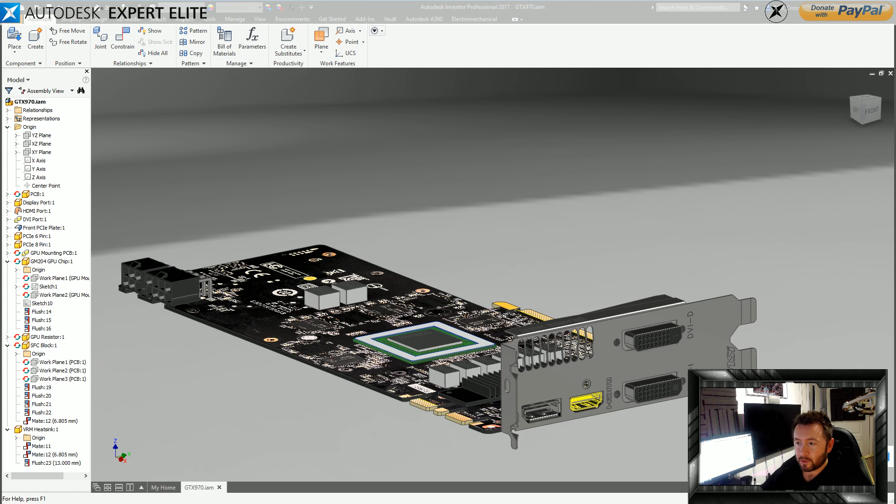Back with the DX Racer. Yes! DX Racer. I shouldn't really have this chair on stream, I don't really want to be endorsing this ridiculous company, but a bit more light there - way, that's better. The chair's just, I can't use it at night. I don't know if the mic's going to pick this up, but I'll get up and listen to the clunk. No, obviously it's not doing it, it's not a performing monkey. But at night it goes clunk and rattles the entire house and wakes the girlfriend up, so I have to swap chairs. I like it because it's got the lumbar support, that's good. If only the other chair had a lumbar support. I'm not buying a third chair, I've got no chairs in this bloody office.

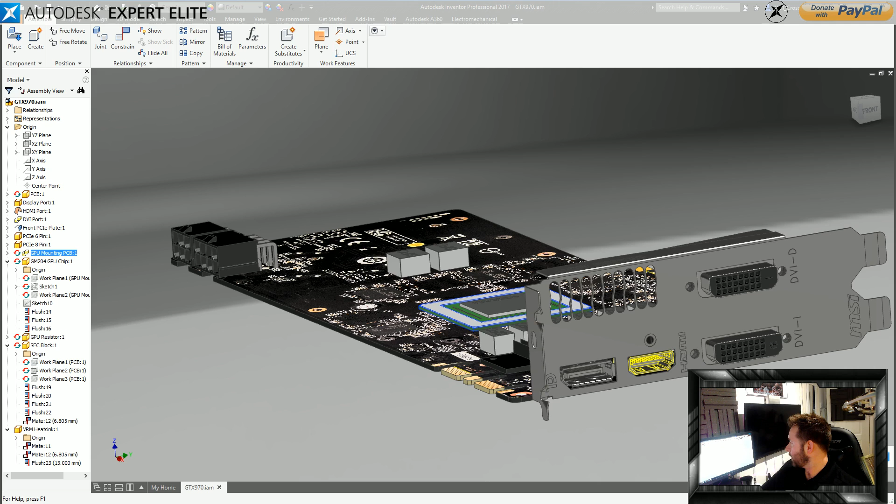Got the ports in: display port, HDMI port, DVI port. I modelled them, including the DVI port at the front. I modelled these two here and put them in a metal case, and these two here are pinched off the Molex website, which you would do anyway.

It's kind of cheating, but not cheating, because you don't. If you make graphics cards, you don't make ports, they're a standard, so you don't design ports. Everybody who makes graphics cards makes the same ports and buys them off a supplier. So if that supplier gives you 3D models, take them, because they're a lot better quality.

Well, you can model that pretty easily, it's just a bunch of sketches and stuff. You could do that easily, but it'll take you a couple hours to get that kind of detail. If someone's done it for you and it's legit from the supplier, get it.

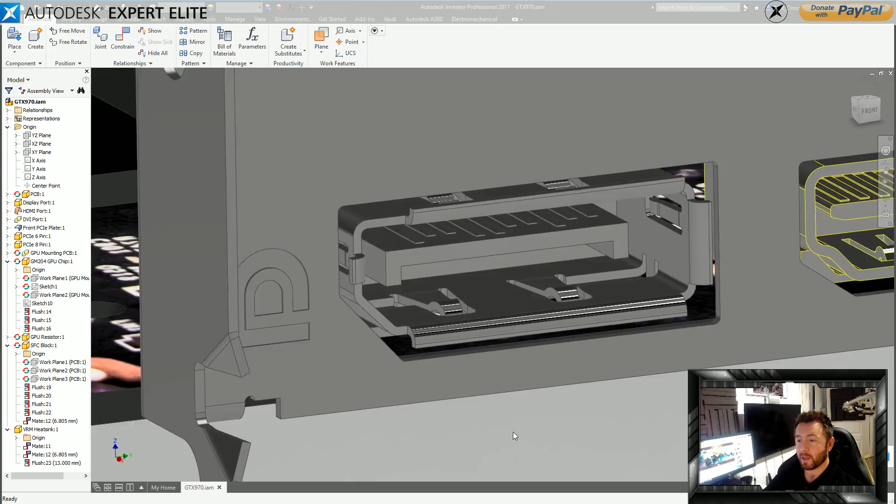But there we look, I even managed to, someone kindly told me what the Nvidia logo font was, so we've even got Nvidia etched into the GPU chip, which probably needs a couple of... does it need a? No, a GPU won't be filleted, will it? It won't have any chamfers on it. No, that's pretty solid. But that green circuit board is...

Hello. Oh, I modelled that, I think that's the VRM heatsink, which the camera's not picking up very well. But I modelled that. Where the hell's that model gone? I just remembered I did that. Or is it there and I've just overlooked it? Oh, there it is, yeah.

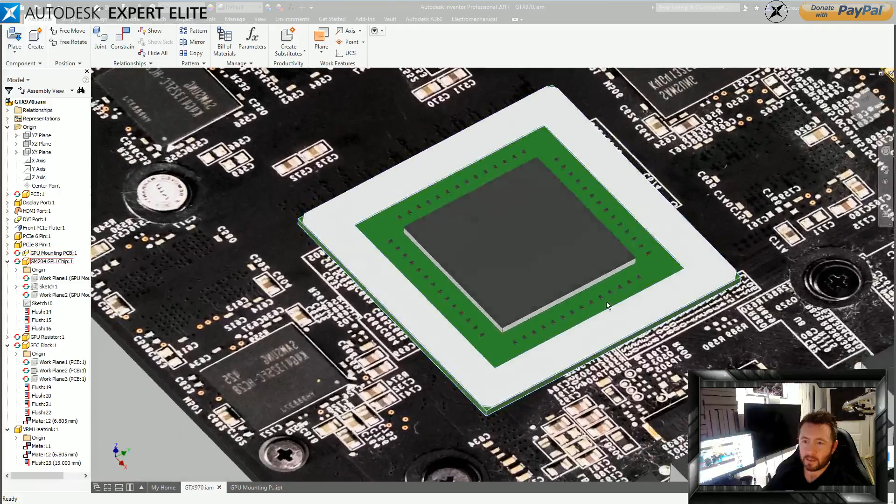One of the jobs I need to do is try and get this goddamn mounting PCB to the right colour, because it'd be trolling me, it's too light. One of the problems I had was when I opened it up explicitly, it's dark green, but then when you go to the assembly, it's a much lighter green. I think it was 2 AM England time by that point, and I was like, I'm too tired to try and figure this out.

I think I need to move on with my life and make it a future Neil's problem. But I think I made the solid body forest green, if I remember rightly, that's the top body, Neil. Solid 2, yeah, forest green, I made that forest green. But then in the assembly it'd be light green. What gives, man? What gives? There's no colour override at assembly level.

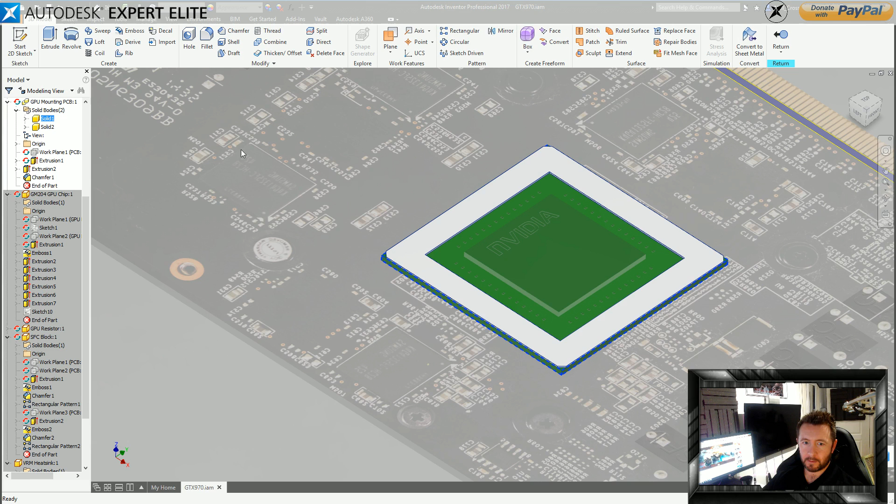Forest green, right, well that's right. I want to change it gold, let's see what happens, right? You're gold, always believe in your soul, you've got the power to know that you're indestructible, always believe in, now you are gold, and that you're bound to return something I should have learned, is your... sorry.

I think I probably should have had a break before I went back to work. Say green! It's still green!

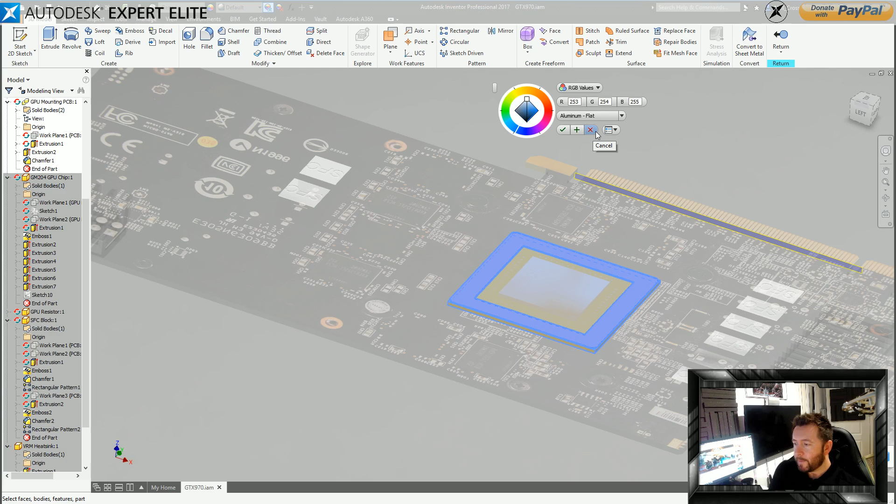Can you elaborate about implementing custom image-based lighting settings? There's very little you can do with Inventor's image-based lighting, very little you could do. They put it in, and admittedly they've admitted that it's there, but they've got no real intention of making it something which you can have full control over. You don't have much control over it.

Did I make a video on it? I can't remember if I did. I can't remember if I did a YouTube video on it or if I did it on the Pluralsight visualization course. But you can go to, where's the internet? Right, you can go to...

It worked. I've got a little pop-up. I'm kind of a big deal when someone subscribes.

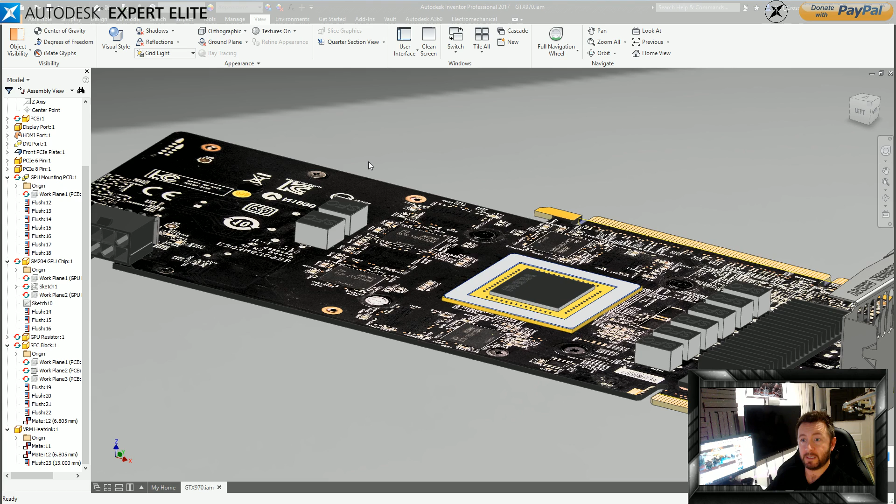But if you want a video on something like that, I can do something on it. I'm gonna have to learn it myself though, because I can create custom lighting styles, I know where it stores them, I know how to copy and edit them. But to change where the lighting originates from within the image source, that's what I need to look up on, and whether you can even do it at all.

So it's possible. It's possible.

How many people are here now? I'm going to keep an eye on the numbers. 37, that's good, that's a good number. It's still, and I stand by it, the biggest Inventor live stream in the world. Go find me another live stream right now that's got more than 37 people watching it. I thank you.

I'm a machine engineer student though. Machine engineer. That sounds way too intelligent for me. I will bow down and submit to your intelligence.

I had the same problem the other day. I changed the selection priority I had, but it may have just been a fluke, it was working afterwards. I don't know if this is selection priority, because the only colour overrides I've got on this are at body level. So if I go to the face of the part, that's as feature, and the feature, which is the extrusion, that should be as body. Yeah, that's as body. And then the body is gold. But if you open up the chip into a separate window, it's green.

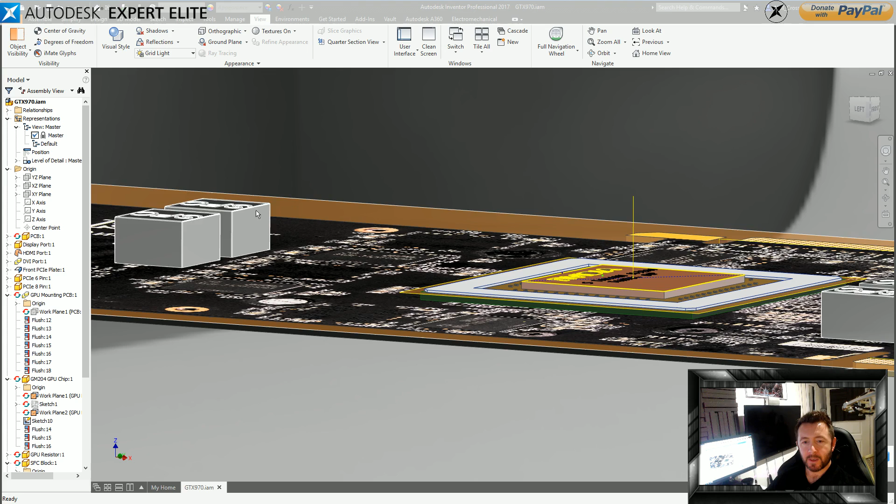So it's changing its colour. Oh, hang on a minute. I wonder if it's storing the colour in that. If I change... you've gone green. I fucking knew it. I knew it. I didn't know it, I just figured it out. So what it was doing, because I'm changing the colour whilst I'm in an assembly, it's storing the colour as an override into the view rep called default. So it's saying you're using the view rep default and you've made the chip gold, so that colour is only visible in that view rep. Whereas if I go back to master, which is everything default, there's green. Son of a bitch.

Right, so what I need to do. I've lost the colour though, because I made it forest green, but then I edited the colour and made forest green darker because it wasn't dark enough. Oh, so let's go into here. Forest green, can I add that to the material library? I don't really need to.

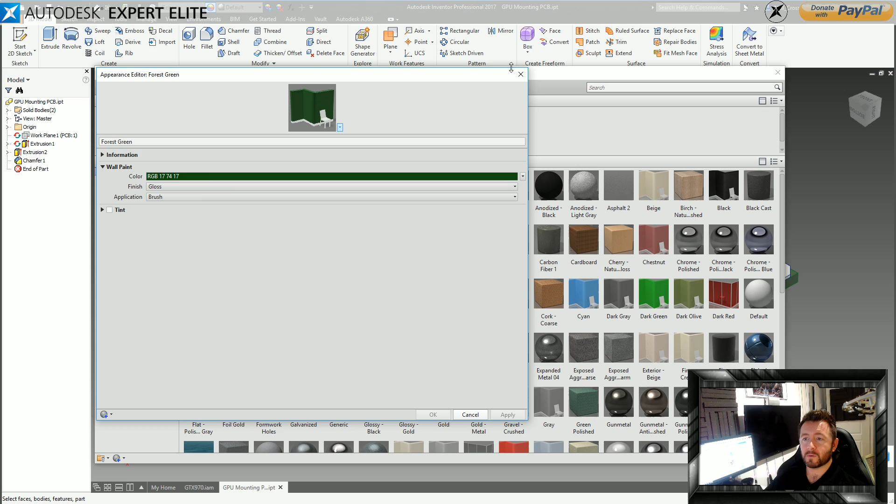17, 74, 17. Forest green, is that still lighter? 17, 74, 17, like... it's hard to tell, isn't it? Is that the same green as that? Bloody hard to tell, I don't think it is, I think that one's lighter.

Right, so maybe it's picking it up from the assembly level colour. That's why. So it's 17, 74, 17. Okay.

There we go. Why has it made the top bit green? Didn't ask you to do that, did I? No. At no point did anyone say, oh, let's give it a flipping override. Let's give it a part level override.

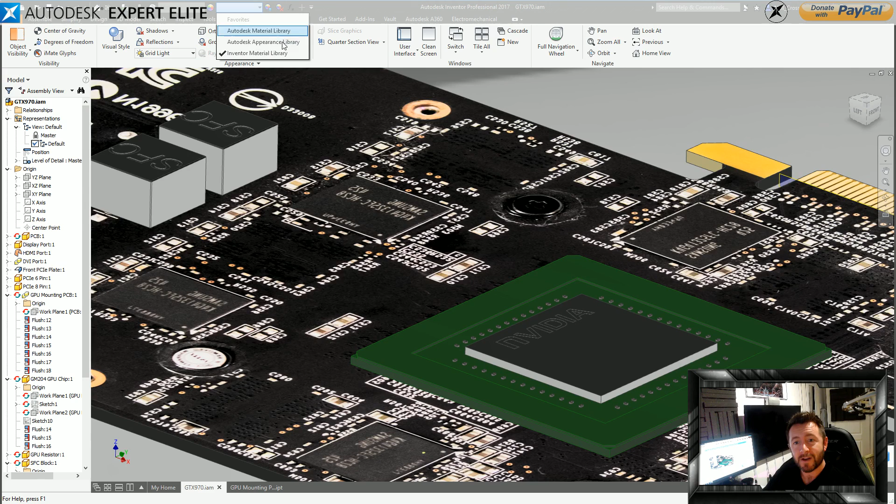Oh, I don't think anyone from Autodesk's watching this. If anyone from Autodesk, which I know watches these videos, hi. Could you please fix this stupid scroll thing here? Why is that scroll bar that big? Look how big that scroll bar is. That's a big, beefy, chunky scroll bar, plenty of meat to grab out of that one. You've got this one here, it's fucking tiny, why? Fix it, fix your shit. It's so small that it kind of blends into everything else, which isn't apparently obvious right now, but sometimes it can.

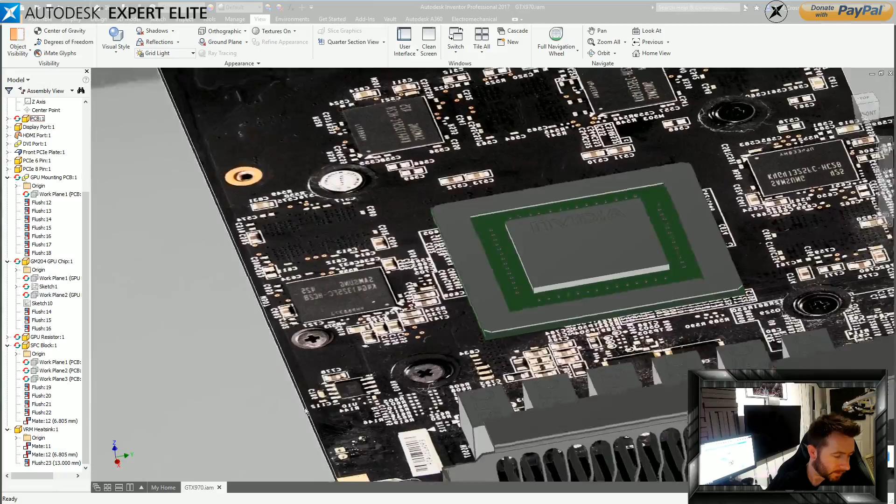Yes, that's better, shiny, it's the same chrome. I think the chip should be black chrome. Actually, no, I think I'm going to change the solid. I'm going to change the shroud again because that's too shiny, it's not that shiny in real life, so we'll fix this one. Maybe aluminium polished. Yes, that's about right. Okay, we're done with that. So what next?

What next? I need to create the USB header on the back, that white thing there. Which is so boring to model, but it's one of those things that when it's on, you're like, oh, that looks quite realistic and detailed. And unfortunately, I don't think I've got a supplier model. I've looked.

Right, so this is going to be tedious, but has to be done. Has to be done. I said no compromise detailing. God damn it, I mean no compromise detail. So where's my trusty tape measure? Who's pinched my trusty tape measure?

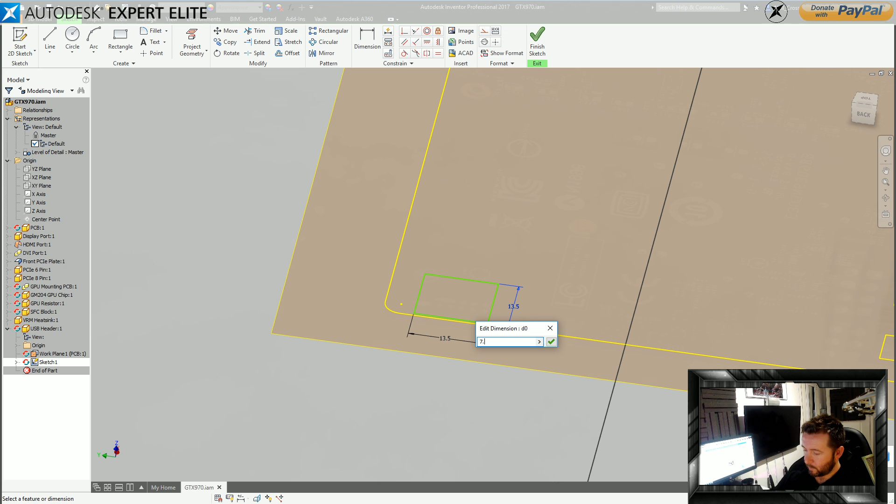No, that's the wrong way. I didn't even need to undo that. Why did I just undo that? I could have just changed that. 13.5, 7.5. It's better. Right.

And then distance on the board. 1, 2, 3, 4, call it 5. This is why it's good to cheat and get a supplier component if you can. That's going to make new solid, isn't it? Yes.

Yes, yes, okay. And then, how thick is this goddamn bit of plastic? Here we go, oh, there it is. Whoa, it's a thin bit of plastic, aren't I? I'm going to call that 0.3. Call it 0.3, and then should I just offset?

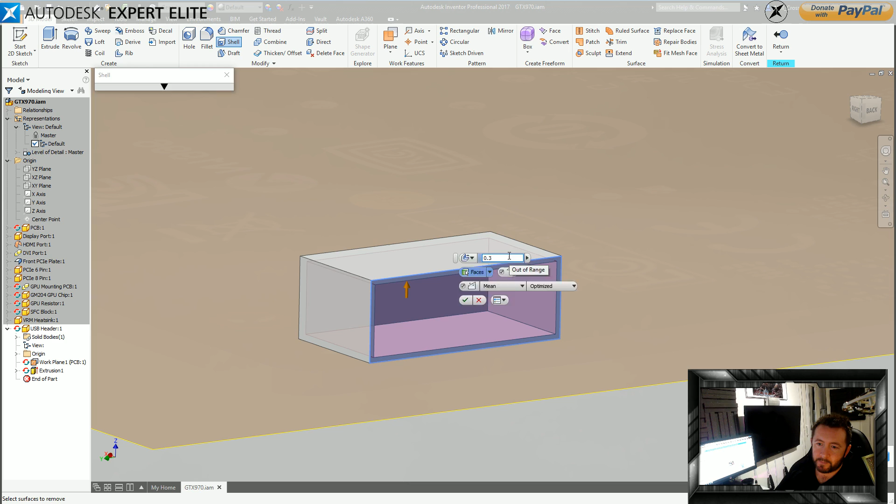Point 0.3, and then Neil, you're a flipping idiot, you've got people watching you doing it so bad practice. Right, I should have shelled it. People watching, that's what I should have done. Right.

And then call it one, oh shit, the bed. Let's call that 6? Wow, the amount of effort I've got to put into modelling a flipping USB header, which nobody gives a shit about. Right, 6 by 5. Ah, that's not right, 6 by 4.

6, oh my god, that's infuriating. That is infuriating, I can probably turn it off, but there might be a time where I need it. It's when you click its dimension, you pull it away to place it, and then it picks up on an edge in the background, it's like, I'm going to place this dimension. Fuck off!

6 by 4. Okay, and then that needs to be central. Actually, that probably is by 5, it's a bit far away from the edge. We can edit it later. Alright. Whoops. No. There, okay.

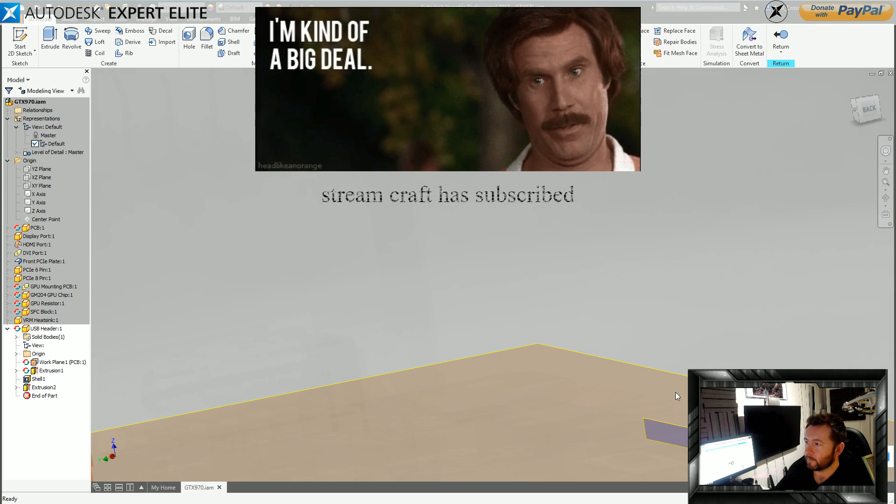Anybody who just says, nope, we're not using it, and says it lightly, like it's not a big deal - it is a big deal. It's an integral part. Kind of a big deal. Exactly, it's a big deal, mate. Thank you, Streamcraft. But yes, it's an integral part of 3D CAD.

Adaptivity is like, yeah, you've got adaptive parts, which is cross-part geometry - change one part, another one updates. But you could argue that adaptivity is also linking two dimensions together, a formula between two dimensions in a single model. That's kind of adaptive, that's adaptivity in a roundabout way. It's an integral part of 3D CAD. There's no point having 3D CAD if it behaves like an AutoCAD drawing where you change one thing and nothing else updates. In my opinion, anyway.

My opinion. Right, I'm going to have to start making some of this up as I go along. This is really not worth spending a lot of effort on a USB header, so let's... I don't think anyone's going to inspect it that close to see if I've got it precision crafted on the USB header. So let's go down by 0.5, down here, something like that. I'm making this up, call it 1.35, call that 0.8.

There's something I liked about Fusion 360, and since I've used it I've always wanted to do it in Inventor, but it doesn't do it. In Fusion, when you've got a closed profile like this, that's an extrudable profile. You can just click the profile and a little pop-up comes up to say extrude, and you can just go straight away. But in Inventor, you've got to click extrude, and then click the profile. It's not the end of the world, it's just a nice little workflow in Fusion. I made an idea station post for it, so I liked it.

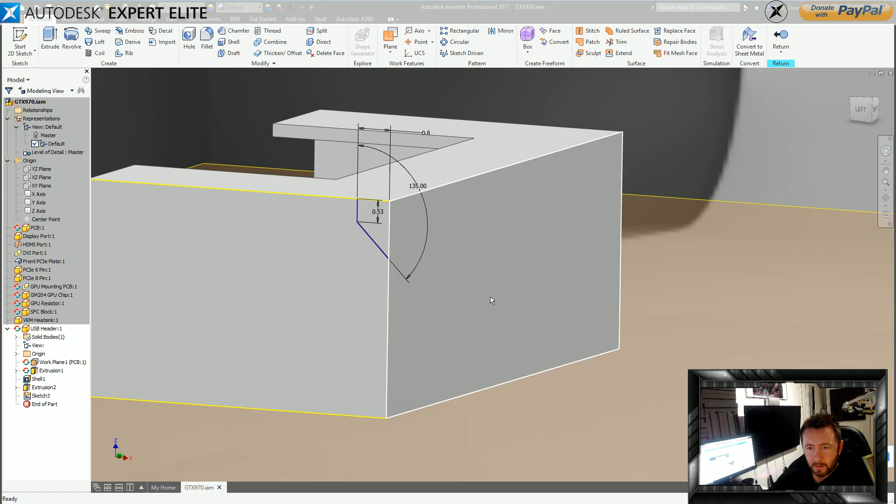Have I tried Meshmaker VR? No, I think I've heard of it. Didn't someone email me about Meshmaker VR? I think someone emailed me about it, but I'm so goddamn busy at the moment that I haven't really had a chance. Bollocks.

Hey? Oh, there it is.

Okay, maybe shelling wasn't such a good idea. So let's, for the sake of it, pull this wall back by a mil. Is that going to work? Yes, that'll work. Alright, and then I need to push that off there and then extrude that through all. Boom, there we are.

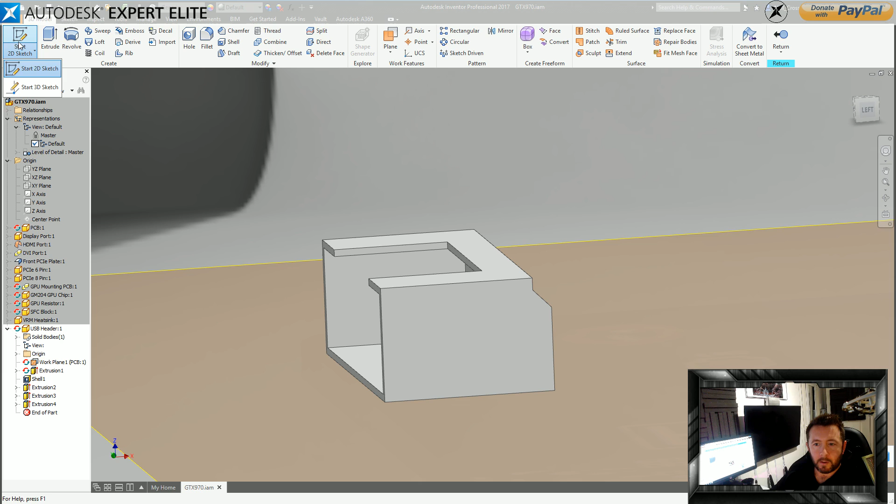Alright, and then there's a nice little groove, about halfway through there, about halfway through. How are we going to do this groove? How are we going to do this groove? We can do it this way.

Right, down there, down there - I don't know how thick this is. 0.5? Something like that. I need this to be central as well, between here and here. So then all I need to do - not that one - is grab that and push that by 0.1. No, 2, 3, 3. Cut. That way, that way.

So you agree you should be parametric, but whenever you've utilised adaptivity between parts, it's been a disaster later on. Yes, it can be - on big assemblies it can be a nightmare. It can slow the performance of Inventor down significantly, as it's trying to solve adaptivity and figure out what's joined to what, and whether stuff is still updating.

A lot of companies break the adaptivity on big models, like vehicular size models, not coffee machine size models. They'll break the adaptivity just because it becomes a bit unmanageable later on. When you've got a GA the size of a vehicle, you tend not to rely on adaptivity for updates. It's all individual component level updates. You're changing a plate, changing a part, and not relying on the CAD software to figure out what updates because it's a project. It's engineer controlled, so you'll know as an engineer when you change something what else needs to change. So adaptivity isn't such a big deal on that kind of work, but it still has its uses.

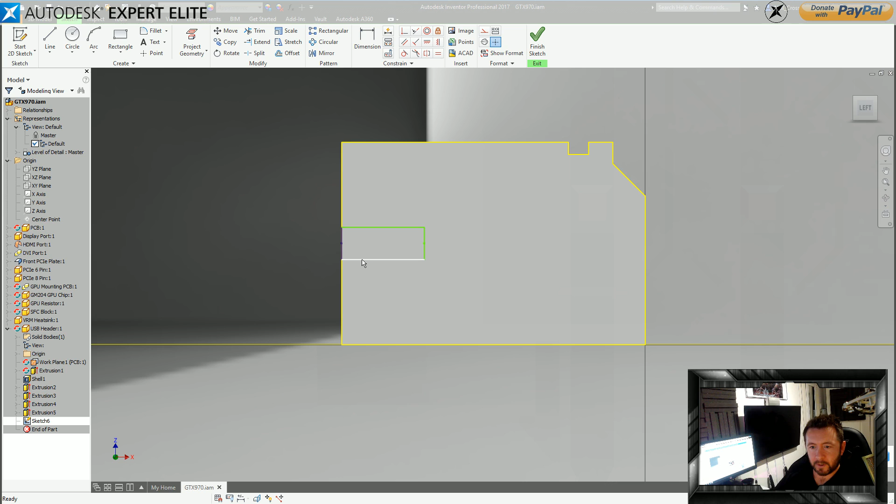Is that even in the middle? It's not even in the middle. Jesus Christ, frighten the life out of me. Right, let's make that there. That'll do. Whatevs, man, whatevs. Right, I think I'll do this and put some pins in it, and then we'll call it.

So I'm alright, well actually there's a couple of little square cut holes here. Fucking Molex, the component makers, ain't got shit on me. I'll sell this model to them. Oh yeah, excuse me Molex, I couldn't help but notice you didn't model your own USB headers. I happen to have done it, pay me some royalties and we can talk. Because evidently you don't know how to do it, evidently it's a bit too much of a challenge for you.

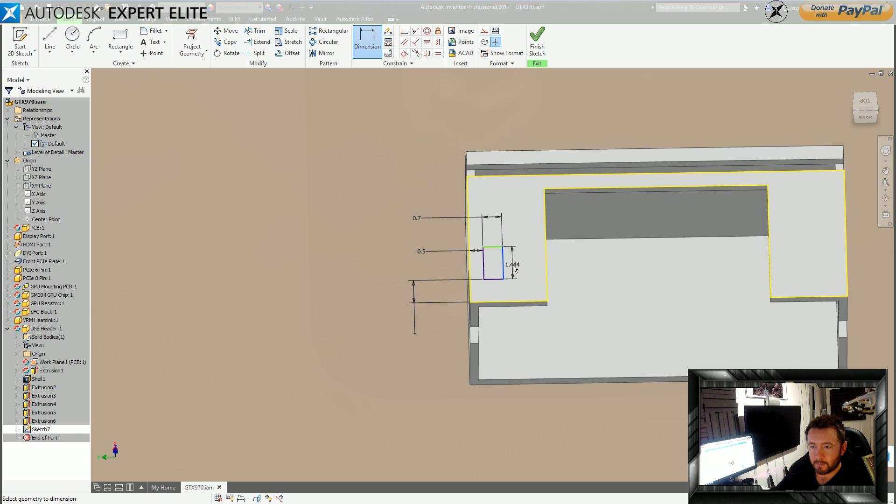That'll do, extrude that to there. Okay, and did I make this central around? Oh Neil, that is shocking. That is terrible.

Never mind, what we'll do is just make a plane. Oh, fuck you. From there to there. Right, and then mirror that around that. Boom. And then you can suck a fat one.

That's it, we just need some pins and we're golden. We're golden on the header. One, two, three, four, five, six pins. Six pins. How are we going to do these? Are these just attached to the back? Yes, they're just attached to the back.

Right, square, and call it 0.2 by 0.2. Well, that's a bit small, isn't it? 0.5 by 0.5. I don't care if you're not central, you're going to be central. And then what's that, 12.9. 2.15. One, two, three, four, five, six, seven, 12.9 by 7. Whoa, 1.85.

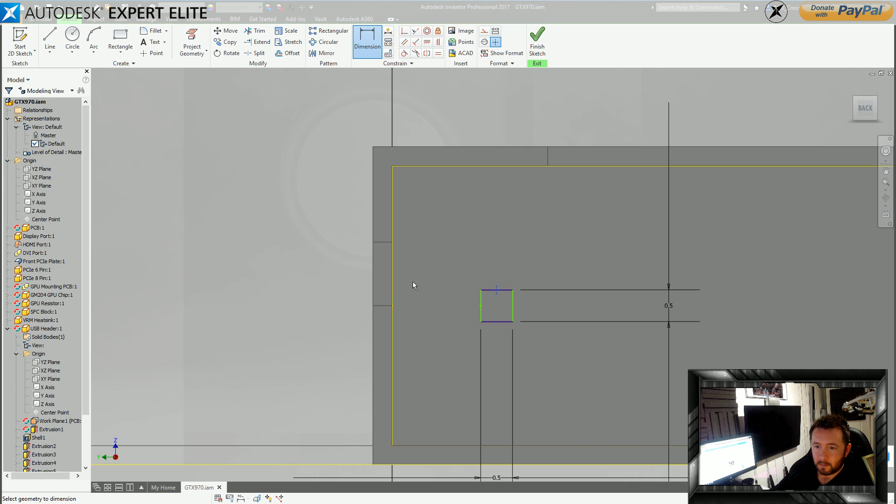Oh, I don't know, I sometimes do wish I knew what I was doing. 1.85. If this works, I'm gonna promote my maths skills as being a little bit better than I thought they were. However, I'm not holding up hope.

So let's pull that out. How far does that go? About there, let's call it 4. Rectangular pattern, you can go that way. No, you can go that way. I said that way. Six at 1.85. Oh, look at that, boom. Creamy. So if I've done my maths right, that should be 1.85-ish to there.

Fuck! Oh no, because that was 1.85 to the center, so that's 1.55. 1.6. 1.55, close enough for me. Is there a way to set a work plane as an origin plane?

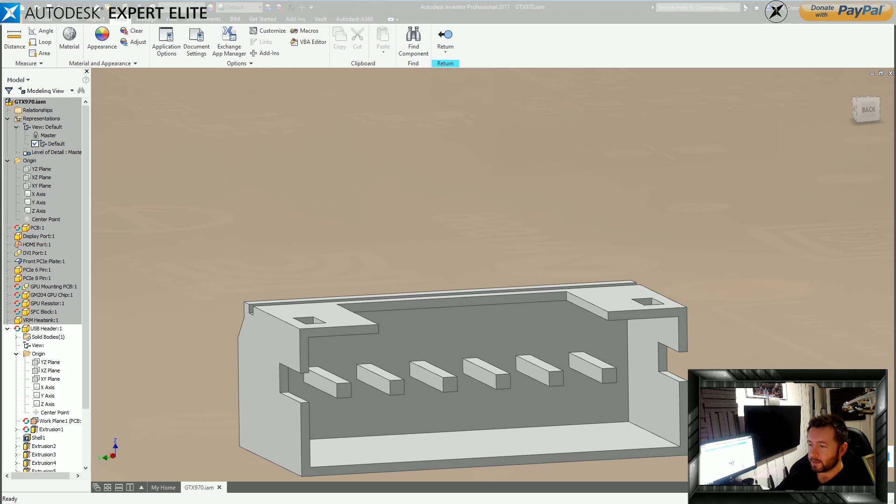No, the origin planes are work planes, mate. When you start a new model, those are work planes. You can keep them on if you control shift them and then right click visibility. See, they're just work planes. They don't behave really any different to normal work planes, other than you can't move them, you can't flip them, but they are work planes. You can't create your own work plane and set that as an origin plane, but you can create your own work planes and give the model a new UCS, a custom UCS. You can do that, which is something I haven't done a video on yet because I haven't really used it myself that much, but you can make custom UCSs.

Right, and then the last bit, which I completely forgot about, but it's not important, is just the little cutout at the back. So, there.

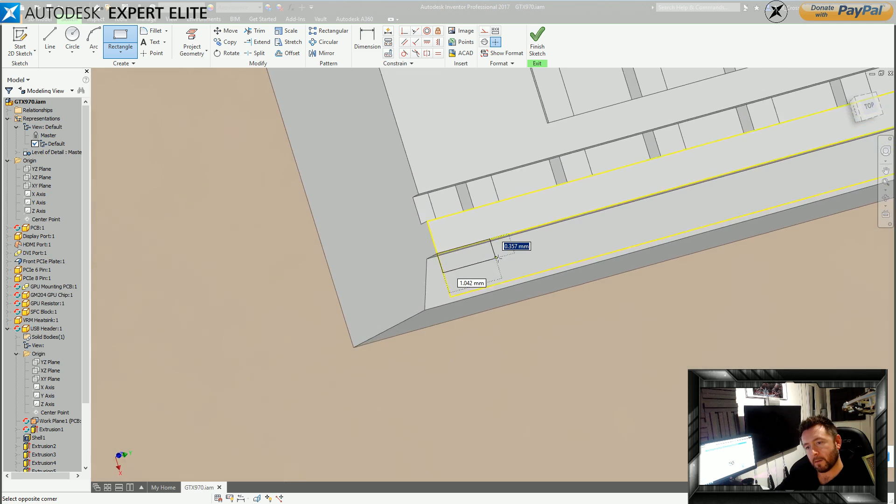Hello Andrew, mate, welcome to the party where we're all having such a great time. Sing Kumbaya. What am I doing? Alright, I know what I'm doing.

Actually it's not a bad turnout, to be fair, what's it, 38 people watching. It's 4:30 English time, so never eat shredded wheat. West Coast of America, they're not online yet, I don't think, it's still really early there, and that's where the majority of the audience are on YouTube. Yes, I just said never eat shredded wheat, fucking bite me. That's how I remember northeast, southwest. Don't judge me, please.

USB header. All rights reserved. Patent pending.

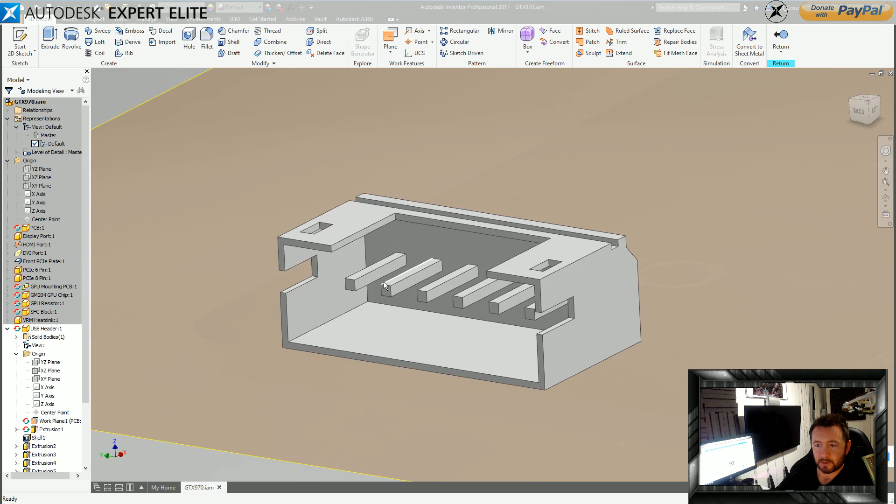The temptation to chamfer the end of those pins is strong, but someone told me off for doing it yesterday, so I ain't going to do it. Okay, we're going to make this white, sort of a ghastly creamy white. No, it's brighter than that, isn't it? Make it white, that'll do. And then the pins - I should have made those their own body, shouldn't I? If I do this, is it going to break the pattern? No.

Hey yes, get in, get in. Gold metal, there we go. Right, USB header done. So what were you saying about recentering your model?

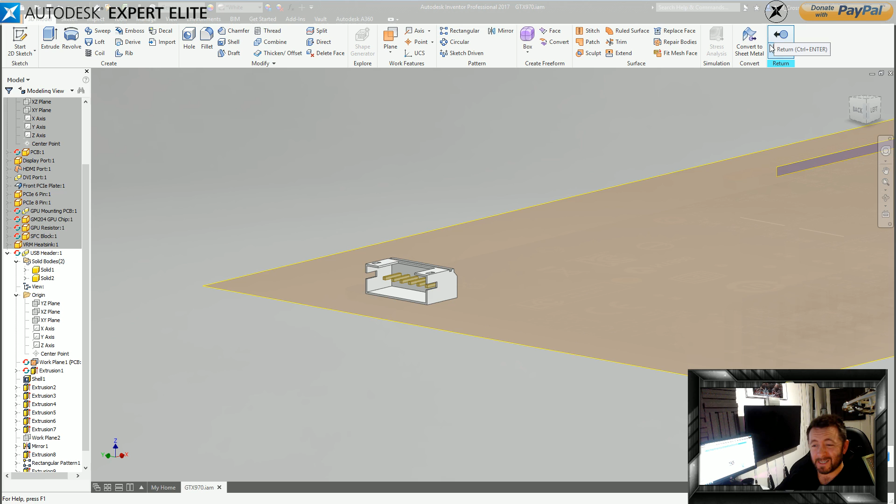No, you can't. If you've modeled the whole thing over here in the center plane of the actual part, the origin plane is over here. You can't move that, you can't move the origin. You'd have to move the original sketch back to there, but it's best practice to have it symmetrical around the center planes. It's not the end of the world if it isn't, it just makes it difficult to arrange and line it up in an assembly later on.

Donald Trump says, maybe in quotes, US intelligence agencies released a dossier alleging Russia has compromising material about whatever.

Can't wait for Trump to get in. Okay, but let's not make this political, because I am not from the US, so I don't understand what's going on.

Oh man, there's one more port. Right. Nope, I have to do it. I said no compromised details, so we're doing this. Right, so there's another port out there, that's the soldering point for it, so we're going to do it above that. So new, I don't even know what this is, it's like a 2-pin.

I think it's the fan, I think it's the fan controller, the port for the fans. So we're going to call it fan port.

Do you upload the live streams after? Gotta run lunch. If they're on YouTube, they'll get automatically uploaded to the channel, so yes it'll go on the channel. I'm still in two minds whether that's a good thing, because this is just me waffling on and not really putting up anything of structured value. But if you want to watch them, you can. Not always the nice guy. Well mate, your message is kind of nice. Thank you very much.

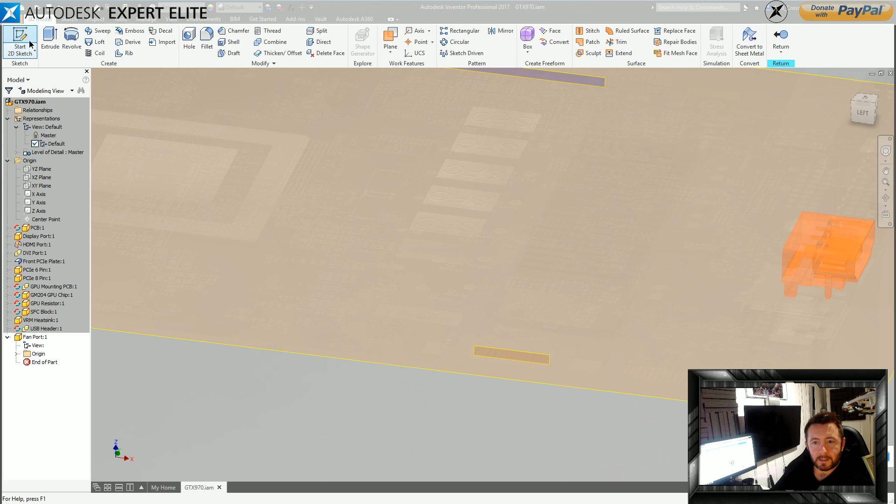Start 2D Sketch, where am I going? Where's the PCB, there it is. Right, and then the port, right, it's about there isn't it? So we're going to go there. Where's my trusty tape measure?

Got 5mm by 4. 5mm by 4, 5 by 4, 5 by 4. And then call it 5 from there. And is it flush with the edge? Obviously not, about half a mm. Oh there, right. Depth 6, call it 6. Right.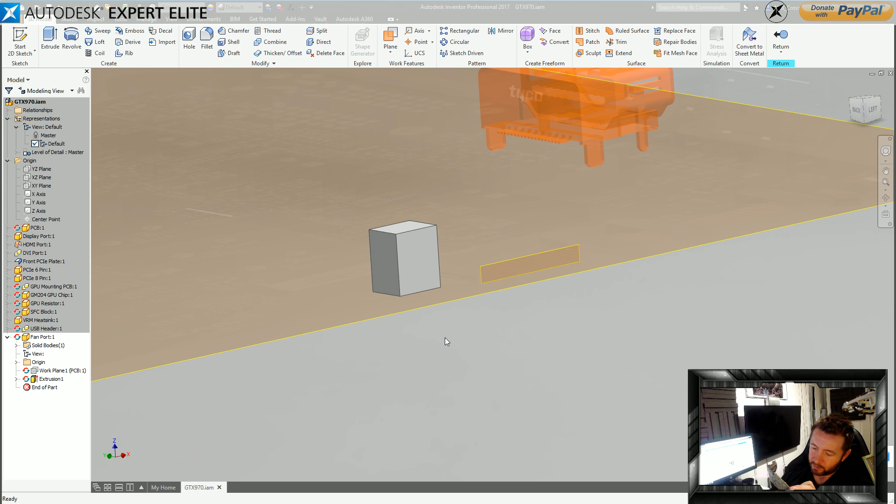Not really the best time of day to be doing an experiment like that, given that the Americans on the West Coast aren't really alive yet, because according to the YouTube stats, most of my audience is in America and Canada.

That'll do. Right, and then which memo? Why am I looking at this? Right, so I need to go on this side here.

But I ain't streaming for too long, I've got maybe an hour left, about an hour left, and I might come on later tonight again. I don't know, don't know. Depends, I might need to spend some time with the girlfriend, because I've been busy as balls this week, not really done much.

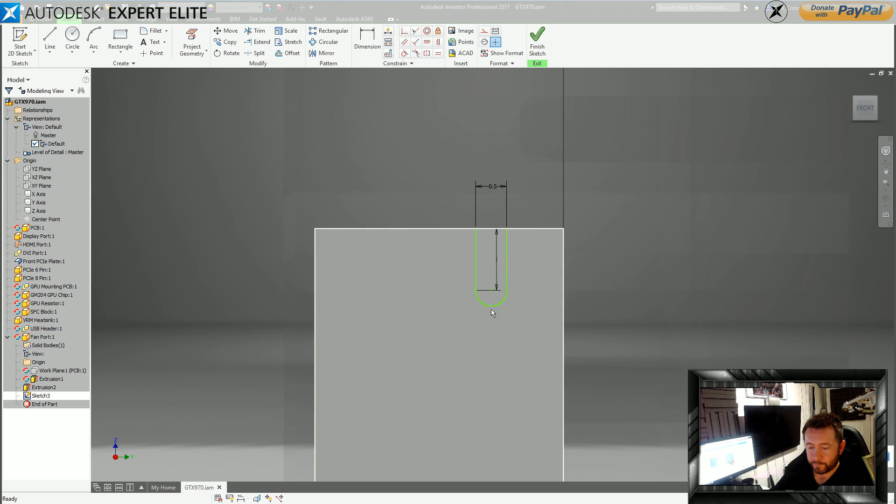I've already done that dimension. You're alright, okay.

Just bring them all over to Twitch, it's far better for streaming. You can still get some of the nice things in YouTube, like I've got XSplit set up to do subscriber notifications and donation notifications, but I haven't seen that happen yet. So you can still do all that on YouTube, but Twitch gives you better moderator tools and better add-in support, and the dashboard on Twitch is a lot better.

Right. Where's the inside of the board there? Right.

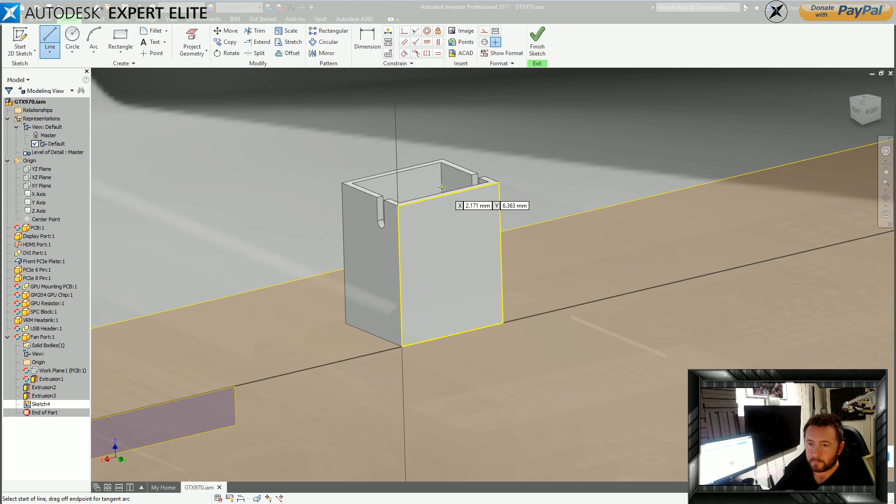But if I'm going to do this on a regular basis, I might need to get a dedicated streaming PC. I haven't figured out why yet, but I've just heard that's what most people do. They say, 'Oh, I've got a stream PC.' Why? Don't know why. Unless it's just so that nothing changes, everything's set up right, and you can just turn it on and go. Maybe, I don't know. Unless it's more powerful of a PC than their other PCs, perhaps. Whoopsies.

That cut to there. Right, that'll do for the header, and now I just need the pins.

Oh, stop it, zoom extending. What do I do? 0.5. 0.5. Then, how far from the center?

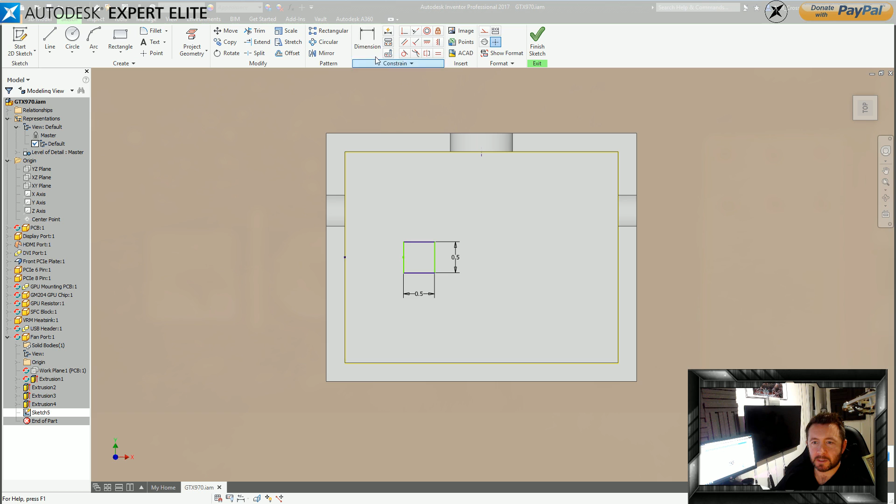Point there. Do you know what would be nice? It would be so nice if the Inventor team - hi if you're watching - could let you dimension to a midpoint without having to put a sodding point on. For crying out loud, come on, even AutoCAD can do that, can it? Can AutoCAD do that? You can snap to the midpoint, can't you, in AutoCAD?

One. You see my AutoCAD video I did the other day, yesterday? It's a bit strange, but apparently - I was quite shocked that you could do PDFs to AutoCAD.

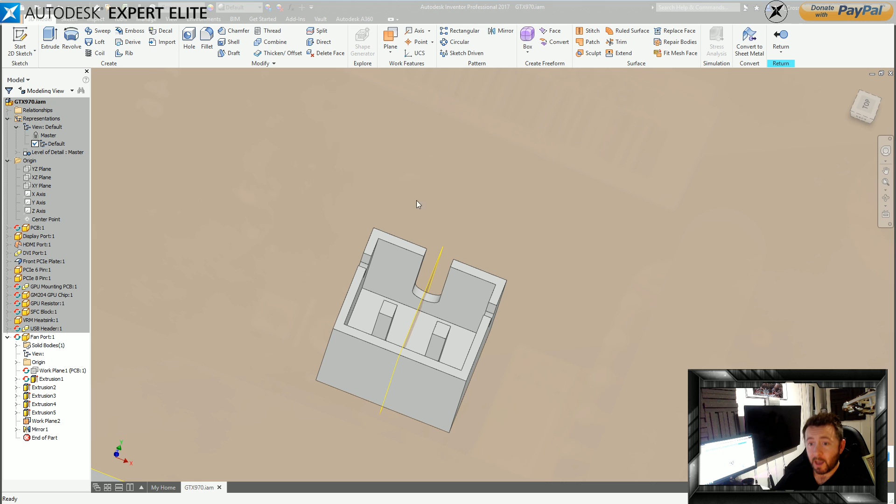You don't use a 3D mouse? Yes, I use a 3D mouse. Of course I use a 3D mouse, there's no way this is happening without a 3D mouse, man. Getting outdone without a 3D mouse. In fact, I've got 1, 2, 3 - I've got 3 3D mice, 2 Enterprises and 1 Space Mouse Wireless. I gave away a Space Mouse Pro, and very soon on the channel there's going to be another giveaway on a Space Mouse Pro, very soon.

Right, gold - that's the same colour, that's white. So we're going to make the entire part white, and then make that body there gold. Always believe in yourself. Gold medal. Boosh. Good, goody gumdrops.

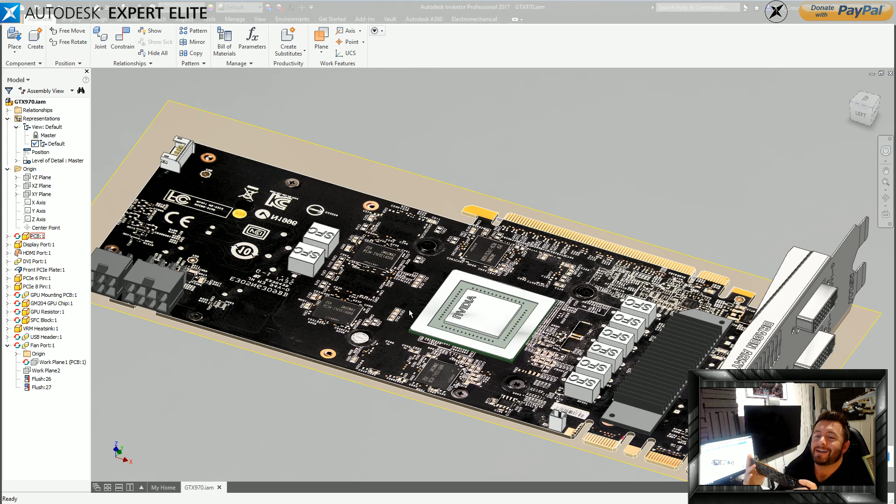Right then, are we done here? So there's some little capacitors and stuff on here, but can I be bothered to model them up? I might model the capacitors if, when the heat pipe and heat sink and stuff goes on, you can still see through where the capacitors should be - then I'll have to model them up. But for now, nah, can't be bothered. Same with the chips, the VRAM chips, these things here - not modeling them. I think that looks good, I think that looks goody gumdrops.

Is this another epic episode? Nah, not today. I'm doing probably another 45 minutes and then I'm gonna have a break, and then I might come back on later tonight. Depends, I'm not sure yet.

Right, so now I've got to model this thing, which is - well, that's annoying. Where I've got my webcam placed on the YouTube video, I can see it in the background, this silly little YouTube icon, so it looks like there's two of me. It looks like I'm sitting next to myself. That looks ridiculous, I'm going to have to fix that. That's annoying, why didn't someone say something about that?

So I'm going to take the frame and the webcam... then, right, let's just do this - frame, webcam. Better. Right, if that's obstructing any views, just let us know. If there's something you need to see, like in the browser, and you can't see it, just let us know.

Right, this shroud then - where does this go? I've dismantled this, and now I can't remember where anything goes. I think it goes over there. Oh shit. Uh-oh. Uh-oh. Ah, goes there.

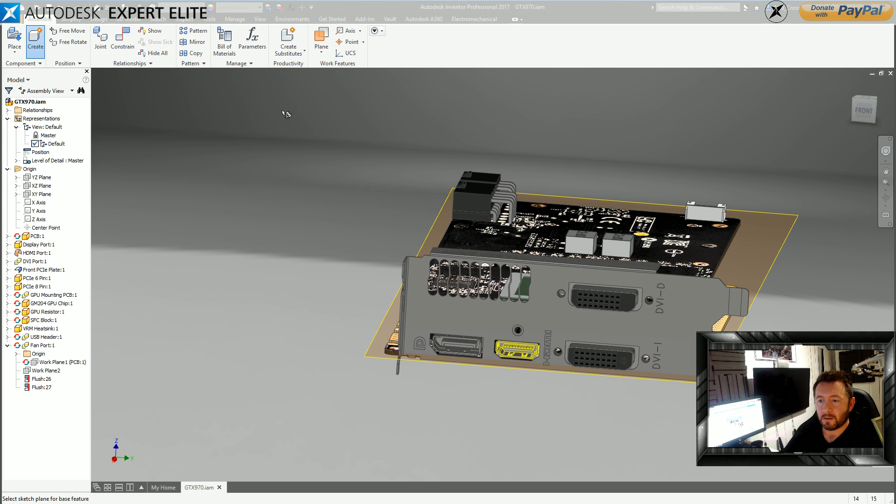Damn, I missed watching you mumble. I do mumble a lot, don't I? If it's inaudible over the music, where's the music on? Ooh, there's only 10 minutes of music left on the Mists of Pandaria soundtrack. Play some WoW - I really don't think that'll go down very well. Oh, patch 7, just don't worry about it. There's a new World of Warcraft patch out today which is apparently a big deal, and I completely forgot about it.

Oh man, bollocks. Undo, undo, undo, start again. I should have made that the sheet metal template. Heat guard - oh it's gonna say that part already exists. Yes, damn it. Heat plate.

Sheet metal defaults - right, so what's the thickness? What thickness have we got going on here? I'd say about a mil. No, not 1 mil. It's about 1.75.

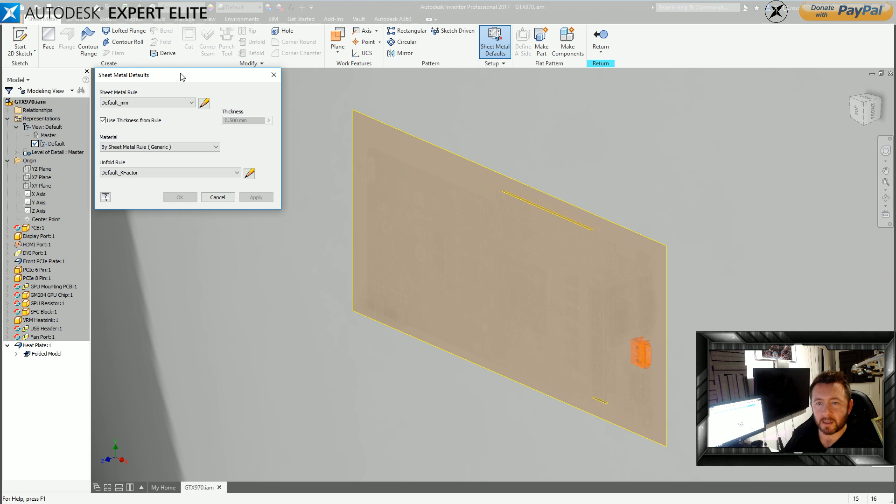Converted sheet metal works - yes I know, but I hadn't modeled anything yet, so I might as well just made a new one. 1.75. Metal, what is it? I don't know, I don't know.

So I need to dodge - this plate has to dodge the two blocks which are there. So there's a block there and a block there. And then it needs to dodge that there, so that's another thing it needs to dodge. And then there's a couple of SMD things here, little resistors and capacitors down here. And then it needs to come all the way down here to where my header is, which is there. I need to dodge around that. Okay.

I wanted to ask, do you have any experience with architectural work with any Autodesk products? I saw Revit is the program to go to. Have a few ideas for houses and stuff, wanted to play around and see if I can get something done. Well, Revit's your boy, Revit's the boy. I've got very limited experience with Revit - started learning it when I was like 24, long time ago. But I haven't really used it since. But Revit is the kind of go-to package for anyone designing houses and any kind of buildings.

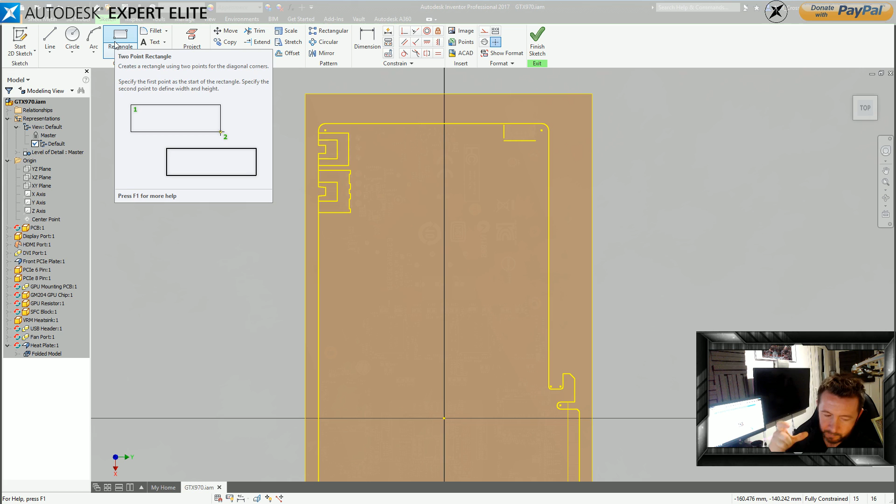Oh fucker, it's not even on the PCB. I've slapped this sketch on the PCB board - it's not even on it. It's raised with thermal pads by 2 mil. So observe my magnificence - I've placed my sketch on the wrong plane. Not to worry, because we can do this: we can raise the work plane up by 2 mil, and then we can go to the sketch and redefine it, and then drop it onto the new plane.

Where's the new plane gone? Where's my new plane? Is that the new plane? Yes. No, because the plane has to exist before the sketch, like that. So, sketch - I need to redefine that onto the new plane. Boom, now our sketch is 2 mil higher. Yes, our work plane's now... yes, that's redundant, okay.

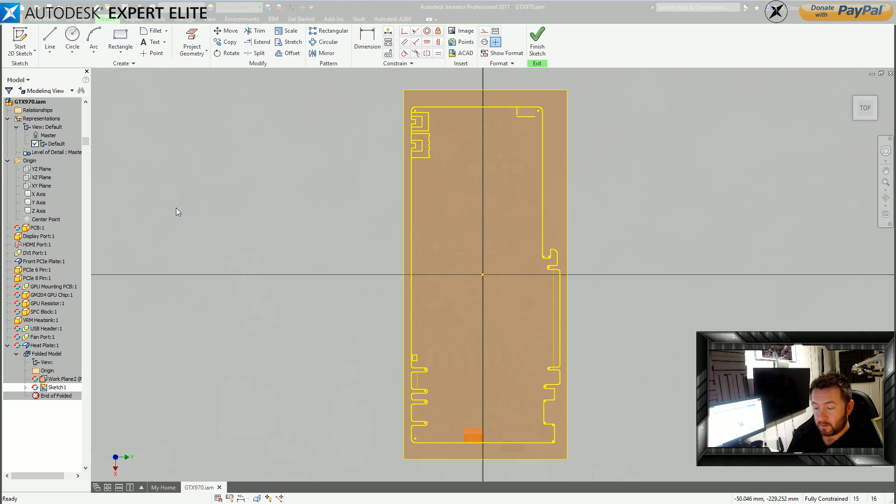Right, I'm gonna sketch out this approximately, and then put the dimensions on. So I'm gonna come on there, and then to there, and then that comes down there, something like this, and something like that. And that comes across to about there, that comes down about there.

And there. I wish they wouldn't do that, man. When you finish the line command on a point that's coincident, it just stops the line command. It's infuriating. Watch this - I'm still clicking, click, click, click, click. You come to a point, boom, it just stops it. I don't want you to stop, man. Trying my patience.

And that comes up to about there, and over there, and then roughly about there, and then about there, closing up about there. Right.

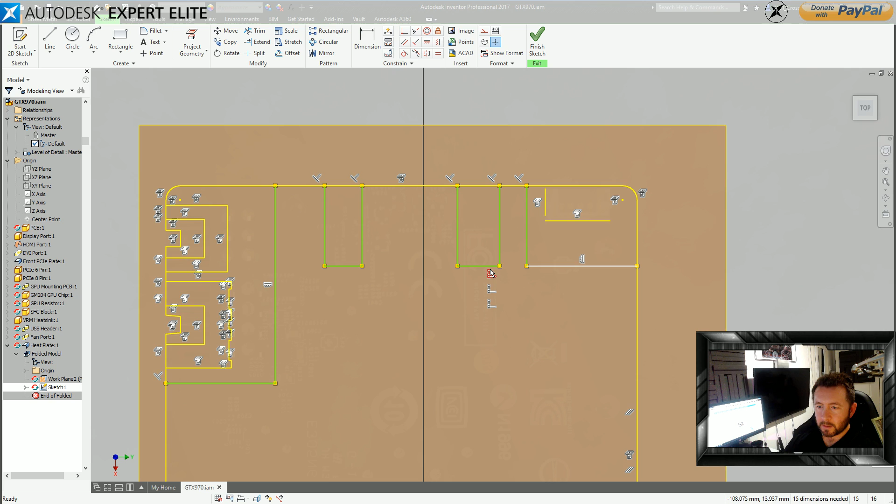Where's the constraint that's making that line collinear with that? Why is that moving all three? I see no... F8, show all constraints. Where is it? Fine, fine.

Trim. Right, I just did that so casually. I had no idea that even did that - just dragging along to trim with a fence line. Didn't even know Inventor could do that. Apparently you can.

Line continues after hitting intersection.

Missed your entire Twitch stream from last time, and I am still seeing it after the fact online. Boy, surely you're not watching back my 5-hour Twitch stream. Surely not. Thanks if you are, but that's not really why the videos are stored, but go for it.

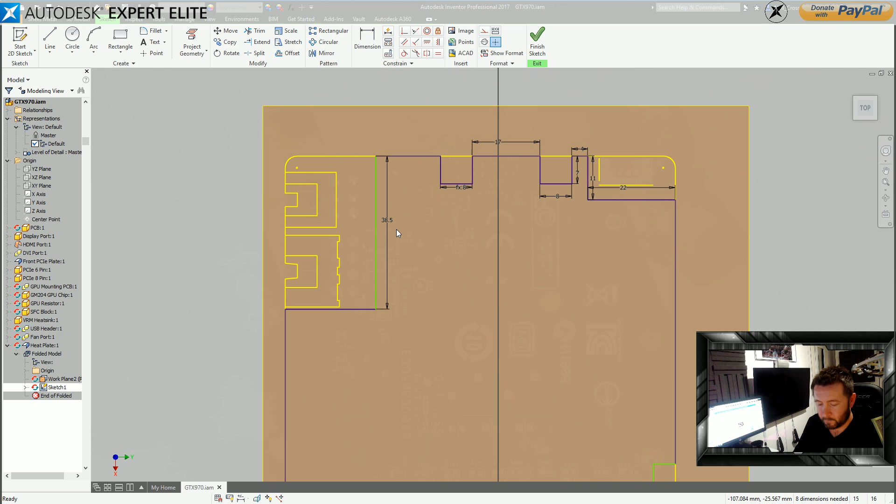137. Whoops. 137 from there.

Let's fabricate this a bit. Let's call that 140, maybe a bit more. That'll do.

Oh no! Right. At 20.

Oh no, music's over. Any more music? Should we have the Warlords of Draenor soundtrack? It was a shit expansion, but the music was alright.

Can anyone hear my PC, just out of interest? I don't know if you can hear it over the music. Probably not. I need a new PC - the coolant pump in that PC for the water cooler is ridiculous, sounds like a washing machine.

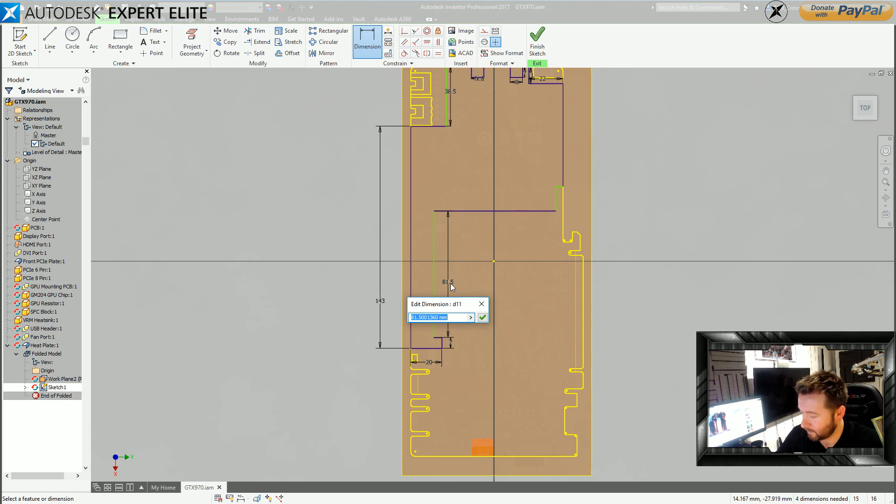But I'm kind of excited to get this graphics card finished though, because it's going to look quality. Let's call it 71. If this graphics card survives after this, I will be very surprised. 16.

Can't hear it. Good, I can. It's doing my tits in. Right, so in from there, let's call it 4.

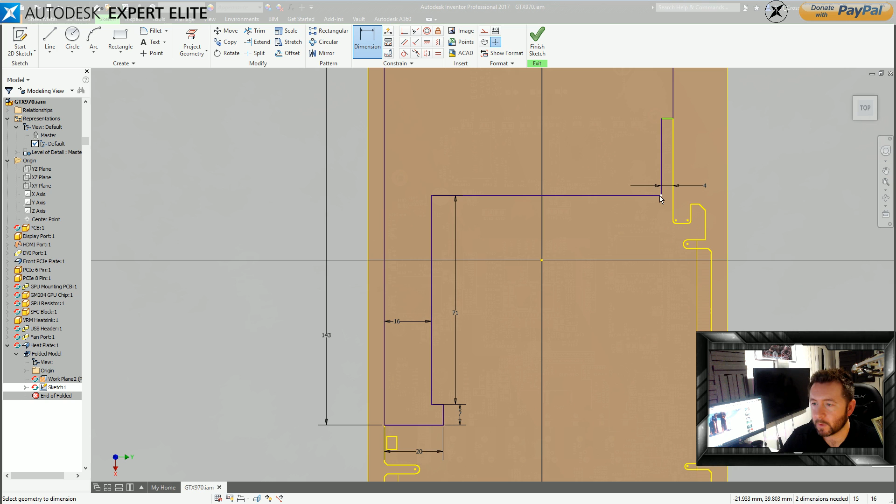What do I do for work? Well, not a lot at the moment. No, I'm self-employed. I run a limited company which has got a huge, massive staff roster of me. So I'm a self-employed contractor, and I usually do vault consulting. Someone will take us on for like 6 months to sort their vault out, which is usually easier said than done, because vault's got a lot of stuff to improve on, and it's quite difficult to do the sorting out of vault.

Kind of a big deal. Valenta, is that Valenta, or have I missed the start of that? Chat's in the way. Thank you very much for subscribing, mate.

Yeah, there's a lot of diplomacy, politics, red tape and stuff for getting vault stuff done. I'm kind of in a grey area between engineering and IT. I need access to servers, and workstations and deployments, and that's what IT do, but IT don't like touching CAD stuff. So it's quite difficult to get stuff done at the best of times. That's why something which shouldn't take too long ends up taking 6 months.

Oh okay, right, why is that green there? Oh wait, I need... okay, right, that needs to be dimmed from the edge of the block. Call it 25. Ooh no, 25, that's going to be a bit... fuck it, call it 20. I don't give a fuck.

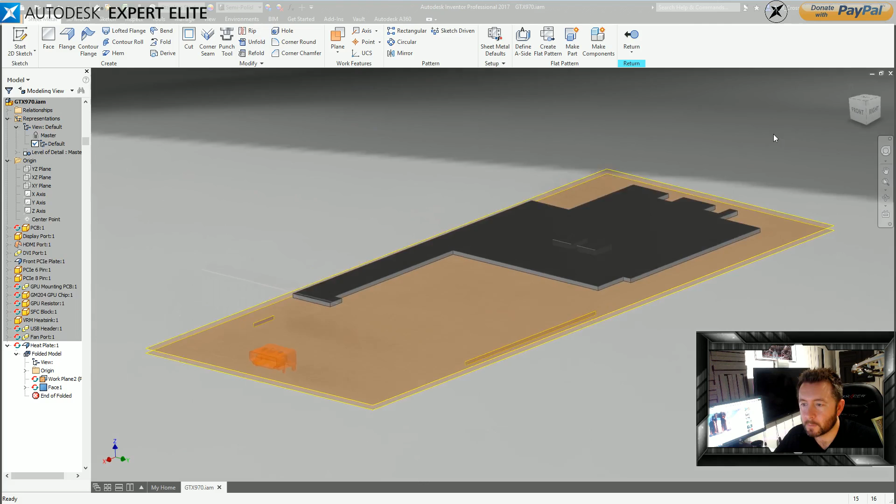Here we go, here we go. Face, boom. Hello, hello, hello, it's better. Right. Oh shit, I was sticking through. Oh, did I model them? No, I need to do the cutter on them. Nuts.

Hey, always found your videos very useful. Thanks for making them. What am I designing at the moment? Graphics card, mate, graphics card.

It is the MSI NVIDIA GTX 970 Twin Frozr 4G, to be precise, which used to be the main driver. Most of the videos on TFI were powered by this card. Then I upgraded to the GTX 1070, took the 970 out, and it's kind of surplus to requirements now, so I thought, let's model it up.

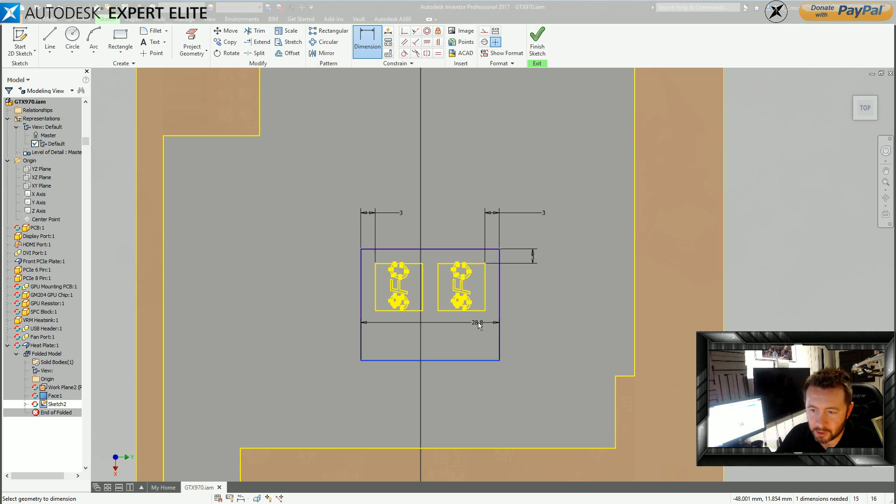I mean, doing a 3D model of the 1070 would have been more relevant, because that's the current generation. It would have got more clicks, got more people interested potentially. But I ain't pulling apart my flipping new graphics card that was 500 quid. No sir, no sir.

I don't think so. Why is it... oh shit, right, I know why. Idiot. Why is it included, that projected geometry, in the flipping thing? Right, I'm gonna have to construction line that. It's better.

You're trying to convince the company I work for to switch to Inventor. It worked great with AutoCAD Electrical.

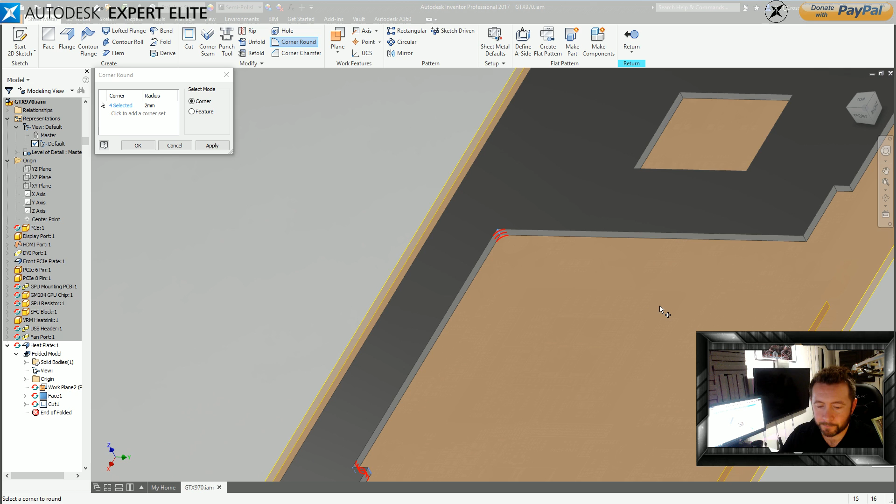Are you crazy? Are you crazy? AutoCAD Electrical. Hate it. Fucking hate AutoCAD Electrical. At a cellular level, I hate AutoCAD Electrical. Hate it! Oh, good God, I wish it would just die in a fire. Despise every single input, output, I/O bit of AutoCAD Electrical. Awful software. It's so awful that one of the companies I'm at now, they have an electrical team who design circuit boards and stuff that go on underwater machinery, and they just ditched it. They completely ditched it entirely, and they now do their schematics in normal AutoCAD, because it's better and safer than using AutoCAD Electrical. Fact. AutoCAD Electrical at the company I'm at now nearly caused an offshore fire, which, if that had happened, would have killed people. And that was the catalyst to just ditch it entirely. Fucking terrible bit of software.

Shit, wrong one. Don't want to do that one.

You're an AutoCAD Electrical Application Manager, are you? What do you do? So within your company, you manage AutoCAD Electrical. That is a sucky job, mate.

I'm giving it a hard time. I mean, I've just had really bad experiences at a couple of places, not just one. Doesn't mean it's bad for everybody, but for what I've seen, it's a bag of wank.

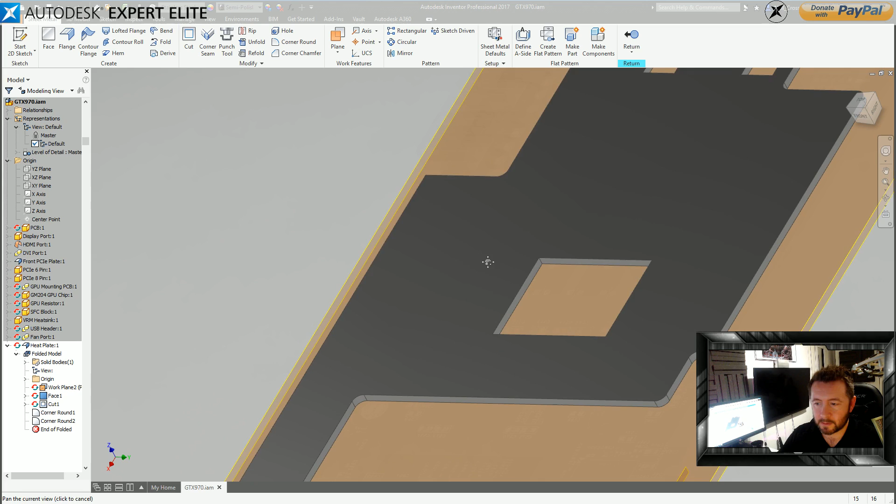The funny thing is, we actually went to Autodesk, because obviously I've got contacts. So we went to Autodesk, managed to get a meeting with one of them, I don't know if he was a product manager or a senior support specialist or something. We did a live meeting with them and showed them all the problems. The overwhelming response from Autodesk was, yeah, that's kind of nothing we can do about that right now, we'll fix it in a future release. And this was 3 years ago. Diddly squat happened. As far as I can see, diddly squat happens at all between AutoCAD Electrical releases.

You're in the offshore, yeah. Basically what happened, I'm paraphrasing here because it's an old story and I wasn't directly involved in it, but all the electrical engineers were doing the schematics and wiring layouts on AutoCAD Electrical, which is supposed to link sheets together, so it's supposed to run a check that wires are connected to the right connectors across sheets, across drawings. AutoCAD Electrical, as part of its sales patter, is meant to do the checking for you, to save a human doing it.

So somebody did that, did the AutoCAD Electrical check, everything came back fine, did the paper prints, and then fortunately one of the seniors did a human check and found that AutoCAD Electrical had just completely missed a whole bunch of wiring errors. It was connecting wires to completely the wrong terminals or something like that. Some wire was going to a different terminal, which if it had actually been built that way would have caused a fire. And AutoCAD Electrical just didn't check it.

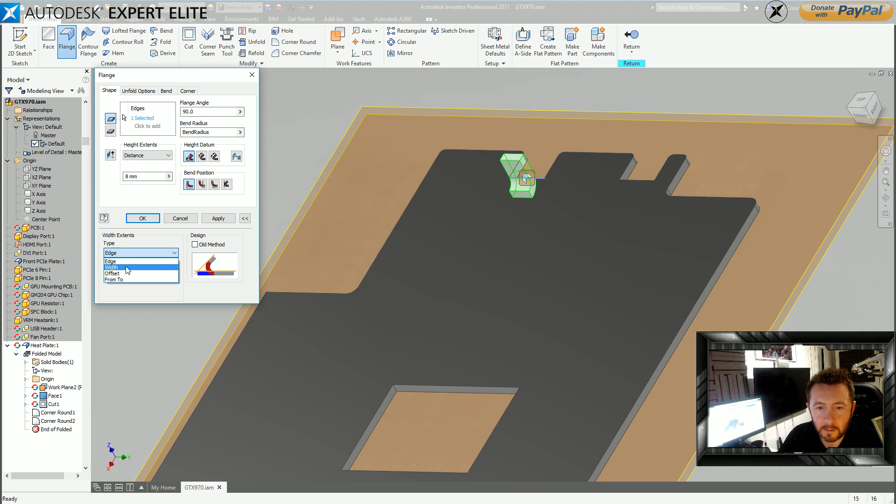Oof. It's not supposed to happen. Corner round. That's more like it. Don't like that little ridge thing there, it's not supposed to be there. Do I care though? 4.5. That's better, 4.5, that'll do.

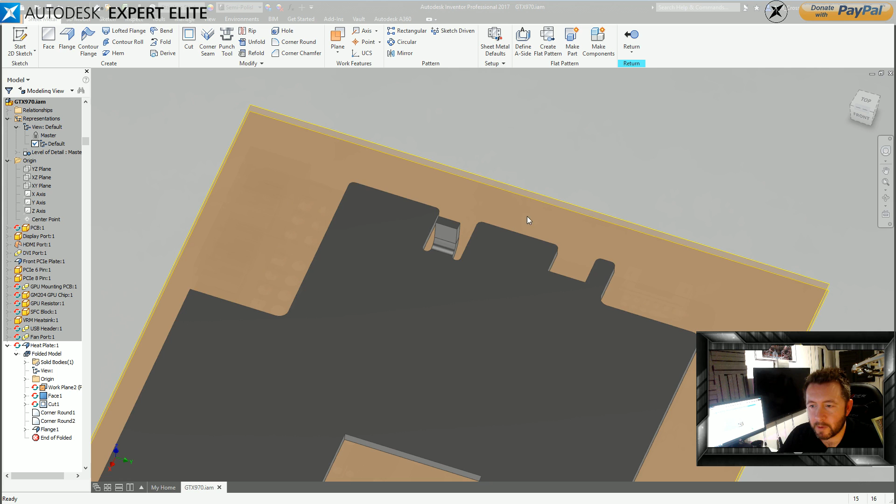Right, can I mirror that, or is that lazy? Like, at the time it takes me to make a work plane through there and mirror that to there, could I have just made that again there? Probably could have done, if I can remember the settings that I used.

Round, round, get around, like it around, get around, round, round, like it around. Boom, there we go. It depends, I like the program, could be better though, it's finicky.

Flipping, it's finicky. The amount of, when you do a reinstall of AutoCAD Electrical, the amount of support paths you've got to put in. Who subscribed? And that, oh Jesus Christ, and oh, I've lost it.

Sorry, thank you. Yeah, if the user overrides the AEX data on purpose or by accident, it will screw you over big time. Yeah, the amount of support paths and stuff that's in there, and the link into catalogs, I just don't understand it. I don't want to understand it.

I've said this on other streams, that there's a couple of things on my to-do list that I need to learn. I'm struggling for time, I'm struggling for brain power, and to be perfectly honest, AutoCAD Electrical is fucking bottom of the list of things that I've got any interest in learning.

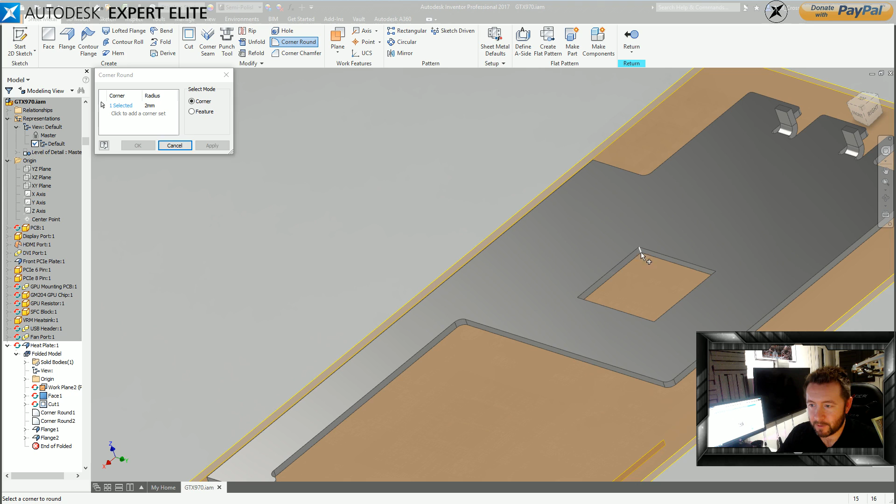No thanks. Whenever, one of the companies I'm at right now uses AutoCAD Electrical. They've got an AutoCAD Electrical team, they're still using it. And whenever an AutoCAD Electrical issue comes up, I just bounce it onto the team leader, say you fucking sort it out, mate. Or bounce it to the reseller. Because I want nothing to do with AutoCAD Electrical.

No spank you. It's my job to see these million support files.

It's probably not that bad if you know what you're doing. There'll be people out there who've had bad experiences with Inventor and talk about Inventor like I talk about Electrical. However, there's just seemingly no development going on in Autodesk on AutoCAD Electrical. I heard rumors - and I can say this because I think it's just rumors - that they were actually going to ditch it and replace it with something else. But then nothing seems to happen.

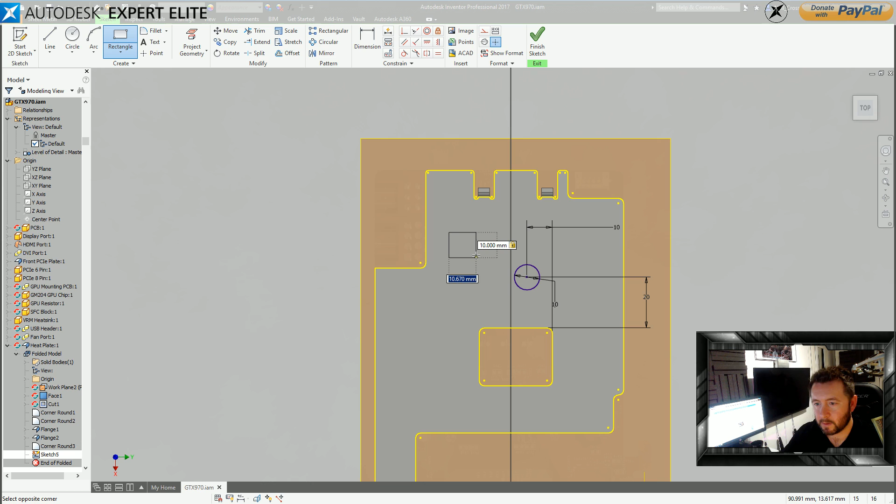If you haven't noticed, I'm just completely making these dimensions up. Don't care. Okay.

I'll do this. Cut - oh man, I made those both in the same sketch. That was bad practice, never mind. And then this one here, about there. This one's close, 10 by 10. I still haven't figured out how I'm going to do the punch bit in the middle. I might just fudge it.

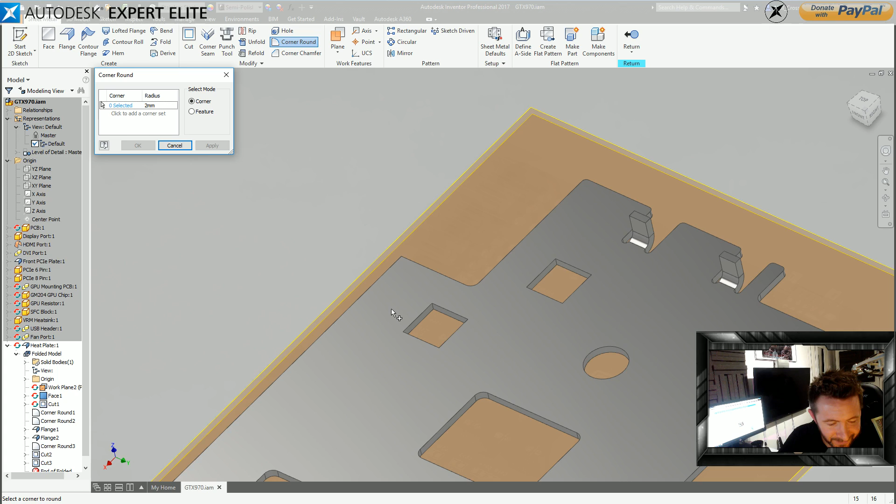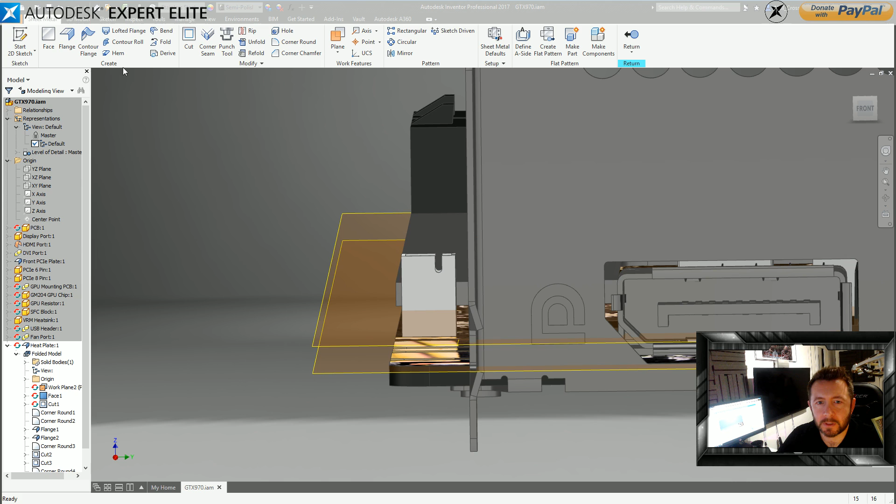Damn, I'm good. Didn't ask for one, I wanted a flange. Who doesn't want a flange? Know what I'm saying? You know what I'm saying?

There we go, there we go. Would you look at that? Well, that's snug as a bug in a rug. I think it's overhanging a bit too much, just need to shorten it a little bit. Maybe 7. Maybe 6.5, maybe 6.5, sweet.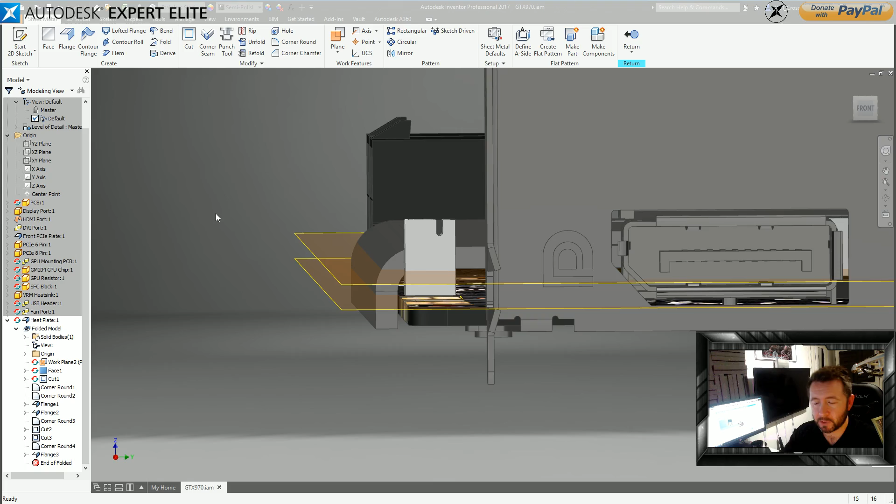What does flange mean? Well, apart from being a rude, silly, giggity word, flange is like when you put a bit of metal into a press brake machine and you bend it like that, and you get this little lip here. So that's what a flange is, that feature there. And then you've got hems, and a hem is like a roll - you can have a single roll, a teardrop roll, a rolled roll, a double roll. That's a hem, it's to get rid of the sharp corners on the metal.

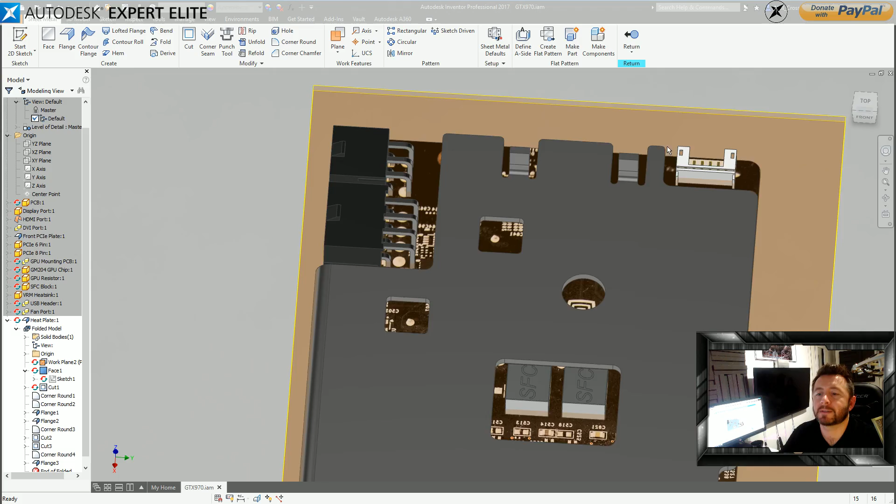That bit there is not quite right. Oh, fuck me, I forgot about those bits there. Shit, I need to change that. Not the face, the sketch, man. So let's call it... maybe it was 25 in the first place. That's better, that's better. Right, I now need to do the raised bit.

And I'm in a bit of a quandary as to how to do this. Is there anything out of the box that I can use? Right, punch, it's a punch, that's what it is. But to do a punch tool, you need a sketch point, and you basically put a punch onto a point. So you need to have the punch already pre-sketched so you can punch it. But I don't have the sketch.

Hang on a minute, let's just experiment a bit here. Right, just put a point there. Right, I only got 20 minutes left. Punch, how many's in? 38. We're getting about the same kind of numbers as Twitch, about the same kind of numbers.

No, I can't punch any of these through. Nah, it's not going to work. Unless I can punch that in right, because that's what it is, in essence that's what it is. Right, let's turn off the transparency.

Right, so let's bend it up at the bottom like that. Can I edit the sketch that is created for the punch? Nope. Nah, it's just going to give us a square, and I ain't punching a square.

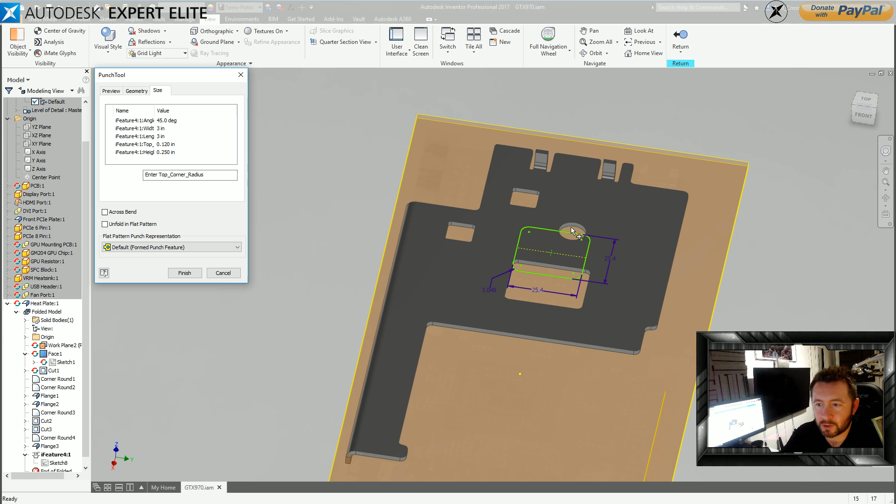Punch tool's a nightmare in Inventor. I don't know other CAD softwares, but I hate doing punches, yes, it's a fucking nightmare. Because you've got to use a predefined punch profile, and in this case it's a square. So I'm thinking if I put a big square down, then I can put more squares down to make a shape that looks like that. But I'm changing the sizes and it's not updating, so I have no idea. Watch, I bet if I finish this, it's going to make a massive punch. Oh, it's actually going to fail.

Brilliant, brilliant, why? Let's see what wonderfully sensible reason you've made as to why it doesn't work. Could not build this fillet. What fillet? What fillet? Could not build this. What use are you to me alive? What fillet?

Do I work with Fusion 360? Nah, I do proper work, mate. No, I've done a couple of videos on Fusion 360. If you check the channel, there's 2 recent videos where I've done an alloy wheel and a Pirelli tyre on an alloy wheel using Fusion 360. But I can't use, and very few people - that's a very inappropriate generalization - but I'll say the industry I work in cannot use Fusion 360. It's not good enough.

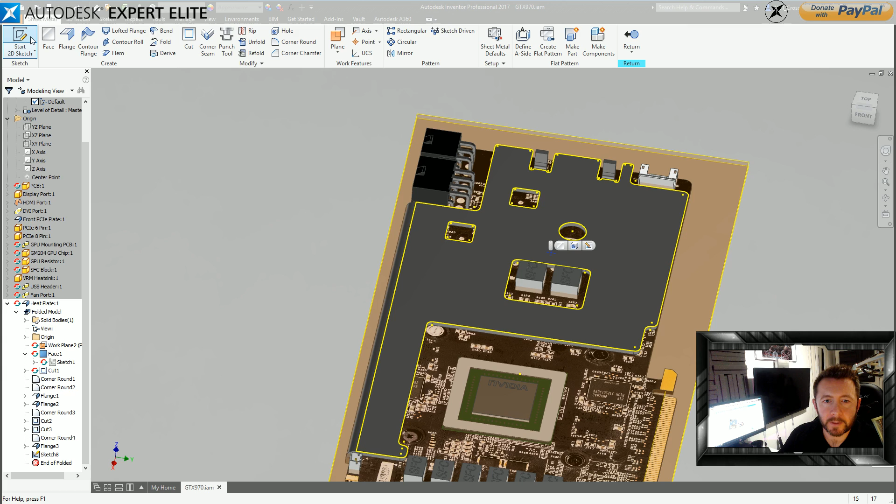Right, got to do it a different way. But that's not to say I'm not going to do some videos on it. Only people watching, 31, where's 7 people gone? Idiot, bye then.

Yeah, so with my channel, I need to know, and I don't think I ever will know, what my total addressable market is. That's how many people I can make videos for, like how many people are interested in the videos that I do, because that type of person is very niche. The type of person who would be interested in my video is purely somebody that uses Inventor, and that's a small market, it's a very small market. That is the absolute limitation of who will watch and subscribe to my channel. And Autodesk won't flip and tell me, they won't tell me how many people have bought Inventor.

Fusion is just, it's something like... Ooh you, Aussie, thanks mate. Thank you, Aussie. So Fusion is another area that I can branch into that'll let me expand the channel, make it grow a little bit further. And it's entirely relevant as well, and there's method to why I'm doing it. Because I just got a hunch, I've got a hunch that Fusion is going to potentially go places further than it is now. At the moment, it's not the best.

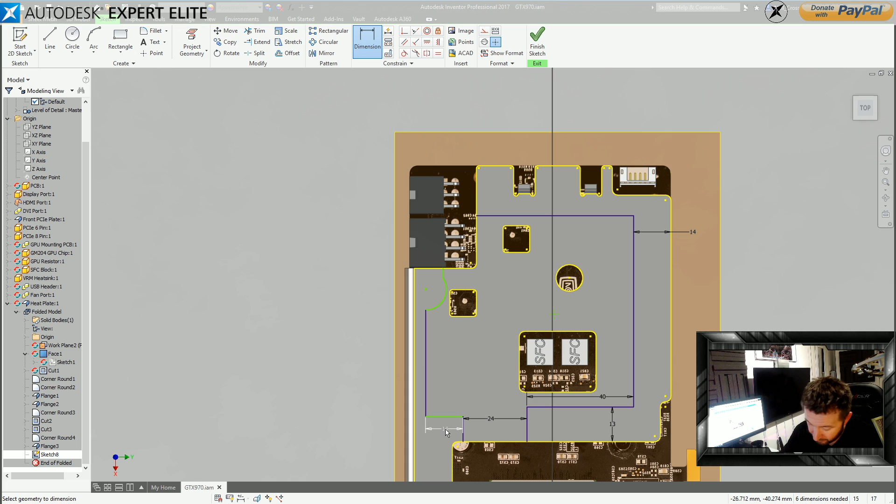And then there's the obvious elephant in the room, which is the cloud storage. Everything's cloud based.

Which is better, Fusion 360 or Onshape? Don't know, mate, I've never used Onshape. Someone else might be able to tell you though.

Having some focus issues from time to time at this end. Focus? What, like the camera's changing colour or something? Well, I've got fixed focus, so the camera shouldn't be going out of focus, unless what you're talking about is the quality of the video. So because it's a live stream, it detects the quality of your internet, and if it detects slow internet or a slow burst, it'll lower the quality of the stream temporarily. So that's why it might go pixelated and blurry, it's just a live stream thing. It might be that.

I also did a design automation machine for a company that makes microchips with Inventor. Yeah, that's just like big machinery. That's what I think you'd struggle to do with Fusion, unless they make significant changes to the back end of it.

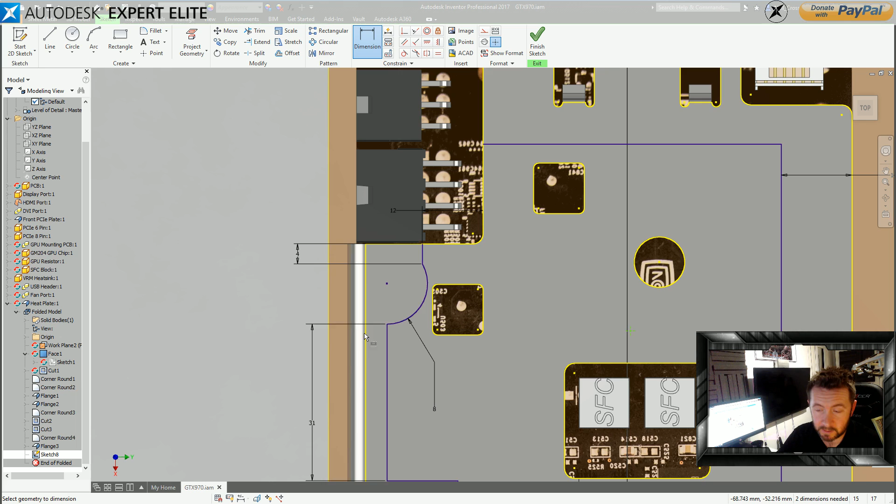So most of them know it, or should know. I guess half of the people who watch your channel have the cheaper version of Inventor. Yeah. Well, that's the answer to the question I'm going to get more often in the future, which is, which one should I learn, Inventor or Fusion? I would, if you're a student, always say Inventor, because you get both of them for free when you're a student. And if you've learned Inventor, you can transition immediately onto Fusion with an almost non-existent learning curve. Whereas if you learn Fusion and then get a job at a company that uses Inventor, there's not an easy learning curve from Fusion. There's a big learning curve going from Fusion to Inventor, because Fusion is just Inventor, the exact same thing, but with a shitload of stuff missing.

So if you learn the full version first and then go to the lesser one, it's not a bother. But if you learn Inventor LT first, which is essentially what Fusion is, you're going to struggle to learn the big one with all the missing bits you've never seen before.

That's what I say to folk. Right now, if you're an engineering student and you want to get into a blue chip company, heavy industrial engineering, oil and gas, that kind of industry, Fusion's just not there. You're going to be getting a job and they'll want the likes of Inventor skills or SolidWorks, CATIA or Pro Engineer, the big guns. Fusion's still arguably a bit of a toy.

Bloody good one though. I did that alloy wheel in Fusion, and it could do everything Inventor could do, just in a long-winded way. You just had to find some different workarounds for things Inventor could have done but Fusion couldn't. You just had to find another way of doing it, a more long-winded way.

I wonder if this is going to work. Right, I want to do it. Shit, I've exited that. Right, I've only got 5 minutes left. Girlfriend's going to be back from work soon, and I need to spend some time with her, because I've been a neglectful son of a bitch. Right, I want to project.

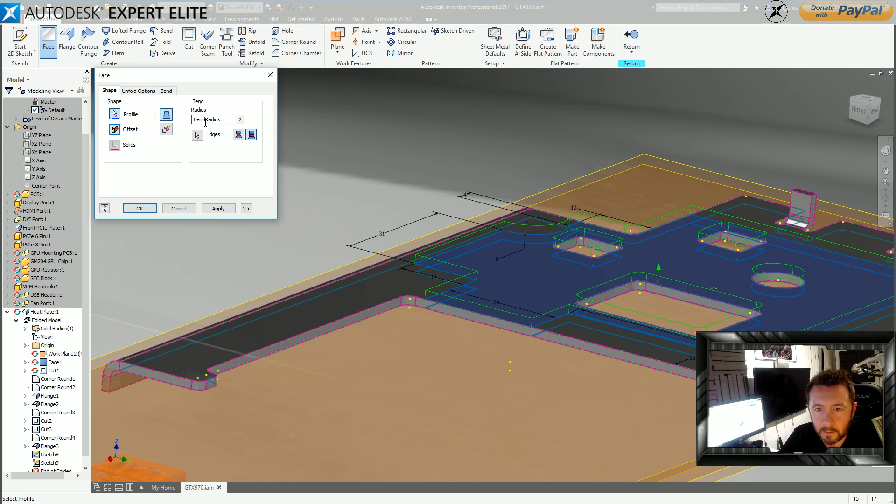That's better. Right, so I want to project that, and face that. Set it that way. It's going to face by the thickness, isn't it? Which I don't want it to. Damn it. I wanted to just do... Can I just do an extrusion then? Can I just cheat and not do a face? Just do an extrusion. Right.

0.75. Extrude that way. And then I need to fillet on a loop. That... 2 mils is a bit much.

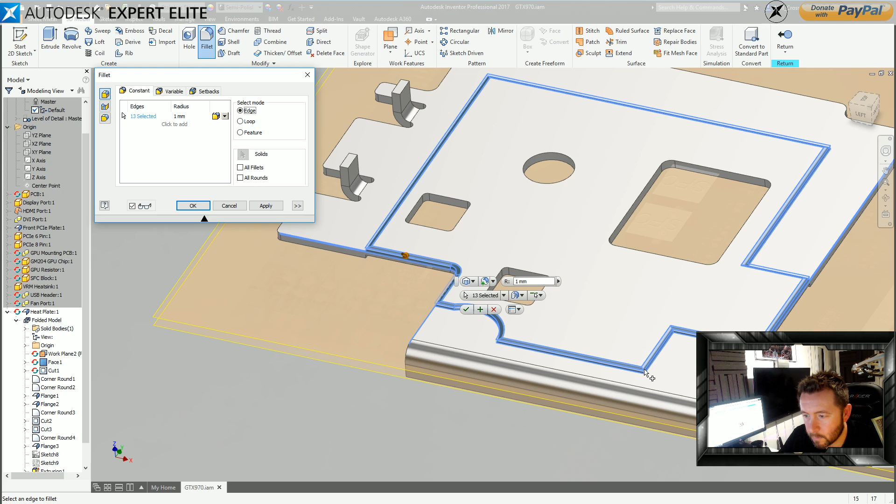Maybe 1 mil's a bit thick. Nope. Right, we'll do these fillets first.

When am I live next? Hello from Mexico. Hi, any HSM videos in the pipework? Nope, nothing in the pipework, mate, I'm afraid. Because I don't work in a machine shop or a company that uses HSM, so don't really have any experience with it. But there seems to be a lot of demand for it though. Autodesk have done quite well to get its name out and about.

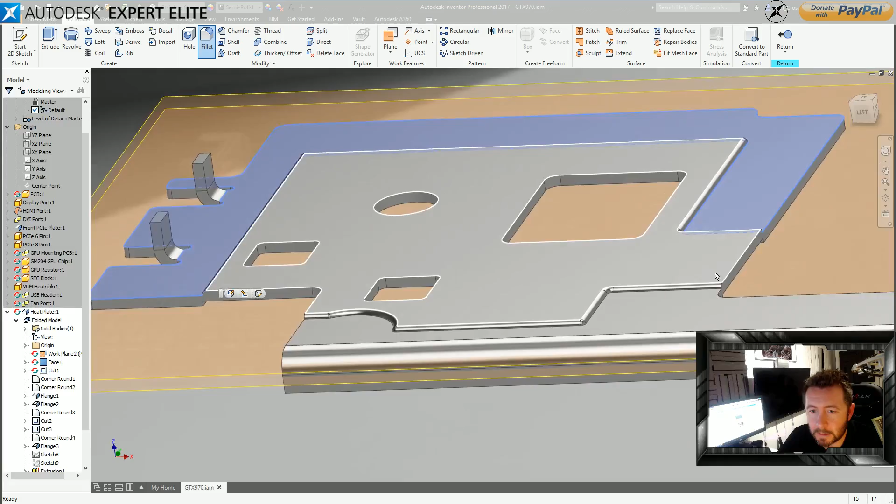But have I just got away with that?

I'm not impressed with the fillet. I think the fillet needs to be a little less in your face. Maybe it needs to be G2. Can I make that G2? Kind of alright, isn't it? And then at the bottom we've got this cut, so I need to fillet that cut. Right, I'll do that later.

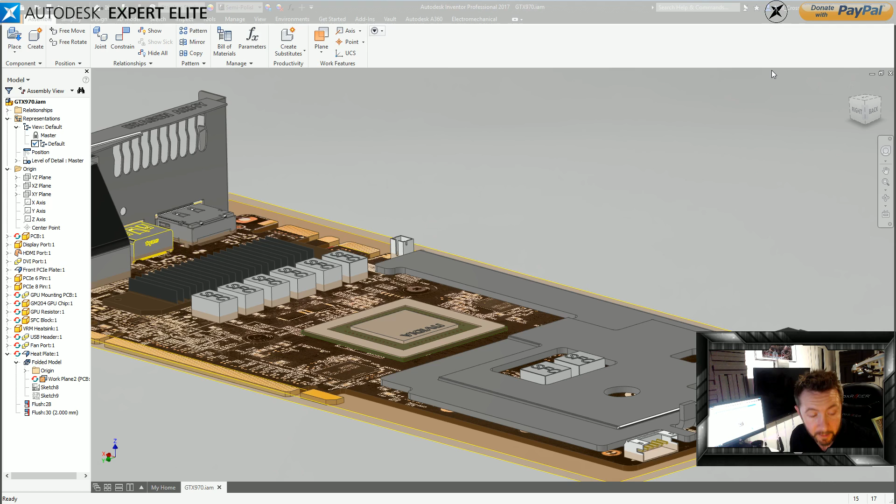How do you rotate the piece easy like that? 3D mouse, mate, 3D mouse. Don't know if I can see this on camera. No, that thing there. Google 3D Connexion SpaceMouse, and I use the Enterprise. That's not the Starship Enterprise.

Can you create a calendared sheet? What? Can you create a calendared sheet? Don't know what you mean, mate. Put a comment on one of my videos and explain more what you mean. I'll see if I can answer that maybe in the next stream or directly to your comment.